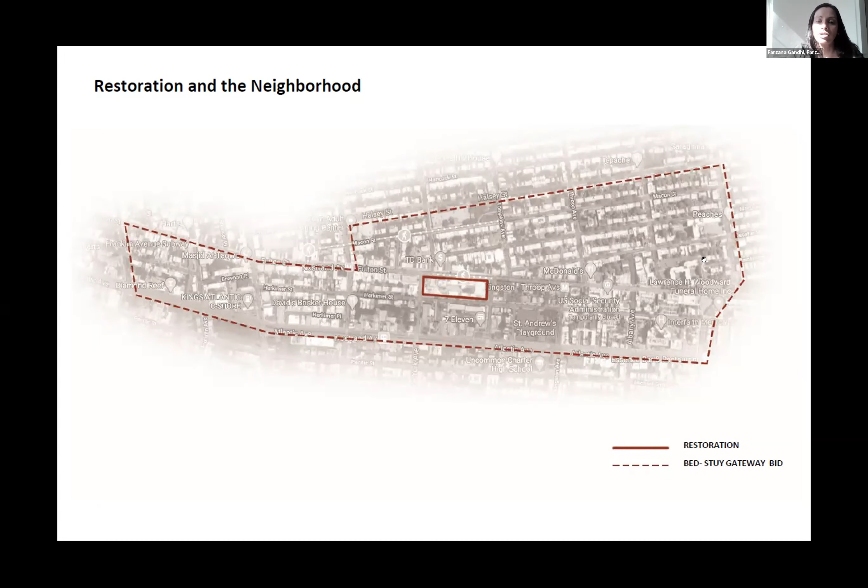With our client, Restoration, these are some images of the block - some open spaces that are public, as well as a large, robust development of buildings. Our relationship with Rachel and Ernest was completely seamless. We met with them every week, and we solicited feedback, but also worked with their team - Restoration Arts, Brooklyn Business Center, and even their social media and events team - to help implement some of our initiatives.

As you can see, the block is within the larger neighborhood, and really what we propose on the block matters and wants to be consistent with what's across the street. Here we started to reach out to both the Gateway BID as well as the BID team so that a cohesive fabric of initiatives could be made.

And then finally, with the community, I would say that our community engagement campaign was a very robust one from the very start. My firm and my team led this engagement with over 25 stakeholders through several Zoom meetings and other individual meetings with individual organizations.

This engagement continues through workshops and also door-to-door with various community residents. Essentially, these stakeholders represent a cross-section of the community through the organizations they serve - whether arts and culture, small business, education, religious organizations, community boards, council members, city agencies. Really, it's about working together to develop a holistic vision of implementation through a series of complementary projects that can reinforce and build on top of each other.

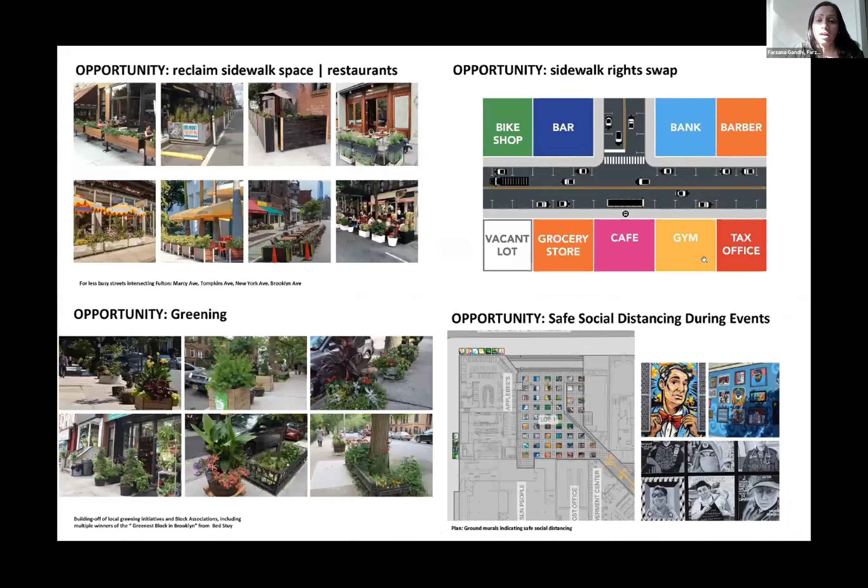And we received feedback not only through our meetings, but we made our meetings public, with Facebook Live sessions and the like, and we started to collect feedback from everyday community residents. We offered opportunities about programming and DIY furnishings that could help with social distancing and reclaiming sidewalks and greening our spaces in an effort to provide a safe reopening.

The social media outreach was 21,000 community residents strong. Links were distributed through our partners to various constituents. Over 820 people tuned in live. 60 and more are continuing to engage directly. And these are being reposted on various social media channels across.

Some key takeaways were about clear communications. So I'll start by offering some of our short-term strategies. This is some signage from our friends at Partner and Partner that have started to populate the neighborhoods already and offer clear guidance on how to reopen.

My team also led the design of a series of pamphlets for various constituent groups - office workers and clients, small business owners, and then one that serves the community at large as part of a Be a Good Neighbor program. This is just a sample of one. You can download them all on the Van Alen and UDF website. We used fun, clear, colorful graphics with minimal text to demystify some of the guidelines of how business owners in this case could safely protect their customers and clients.

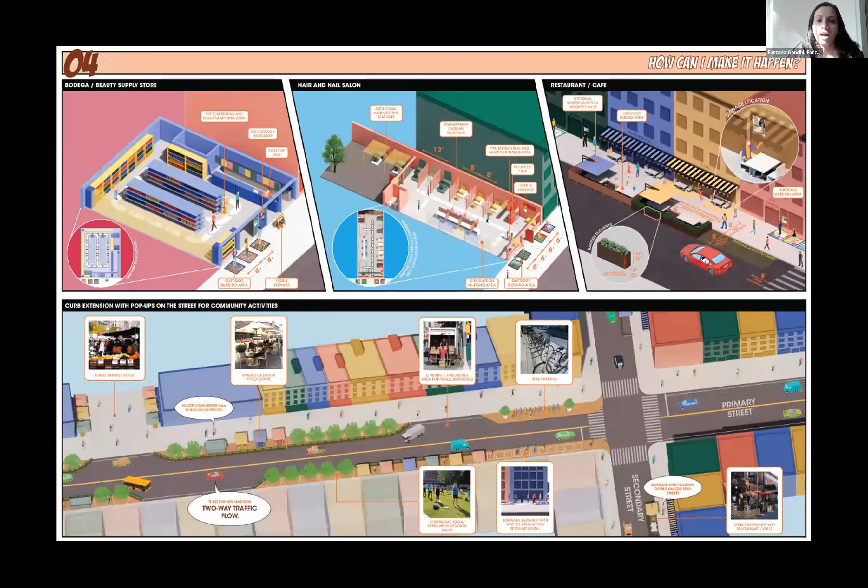We went ahead and also came up with strategies for some of the businesses in the district, including beauty supply stores and bodegas with one-way circulation systems, and hair and nail salons, for example, with partition systems and point of sale PPE distribution.

And these pamphlets really serve to clearly communicate how all of these things can happen.

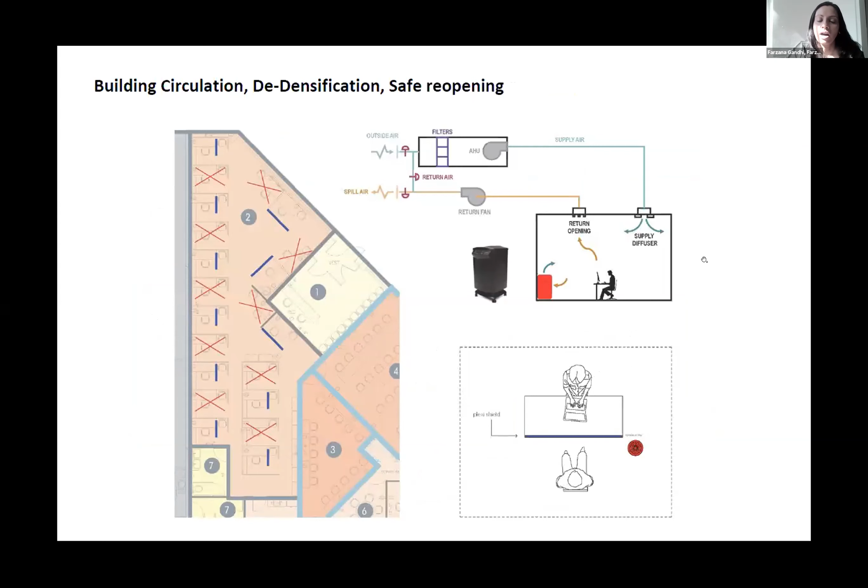KPF led a valiant effort for inventorying all of the buildings on the block and coming up with de-densification and circulation strategies, in and out, one-way flow, and even down to the furniture level within our spaces, so that distance could be preserved within the spaces.

We worked with JB&B to provide HVAC guidelines as well as cleaning protocols and utility tools.

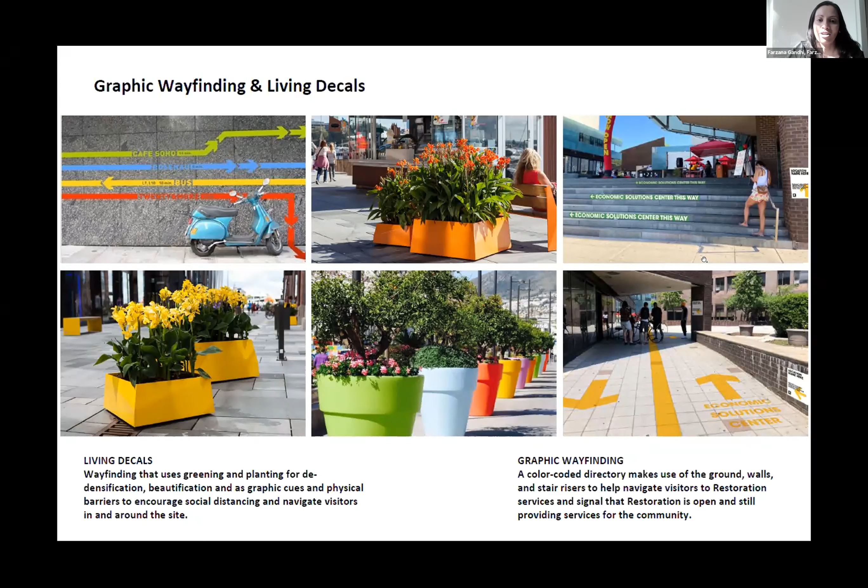James Corner Field Operations has extended the circulation system out to the open space on the block with wayfinding that's colorful and painted on the floor, on walls, and even stair risers, and living decals, as they call it, with potted planters that are color-coded and actually act as graphic cues and social distancing measures.

A big shout out to Blondie's Treehouse for all of their donations. We expect to see some soil, some plantings, and some planters showing up next week for installation.

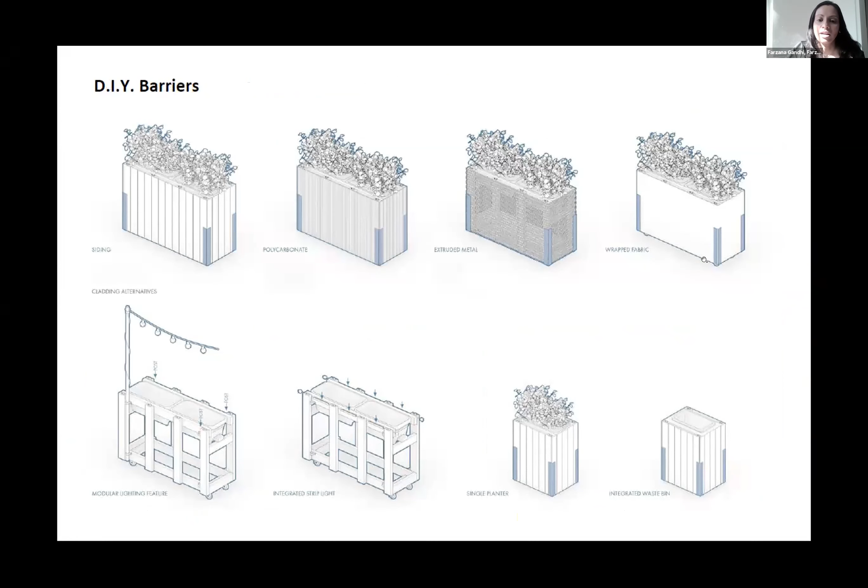Along with that, AE Superlab from our team has come up with a series of very easy to build, using just 2x4s and simple cladding materials, DIY barriers for planters and wastepaper baskets that businesses can now start to implement and replicate for their own street-side cafes.

I'd finally like to close with Community Build Day that Hannah mentioned, which will be happening within the next two weeks, where we intend to start to implement these things not on our own, but with the community. This includes having community members paint some gridding for social distancing squares on the floor, wayfinding, pamphlet distribution and postering, as well as a workshop to enable and empower small business owners on how to build these barriers.

So with that, I'd like to offer this platform to Lisa Switkin, who's gonna speak a little bit about our long-term strategies. Lisa? Thanks, Farzana.

And Rachel and Ernest, you are an inspiration. So I really do hope that you get to say a few words.

As Farzana mentioned, I have the pleasure of introducing our mid and longer term initiatives, all of which depend on sustained community engagement and really a deep collaboration with Restoration. These initiatives build upon and support Restoration's mission and their four core centers, which Farzana mentioned before.

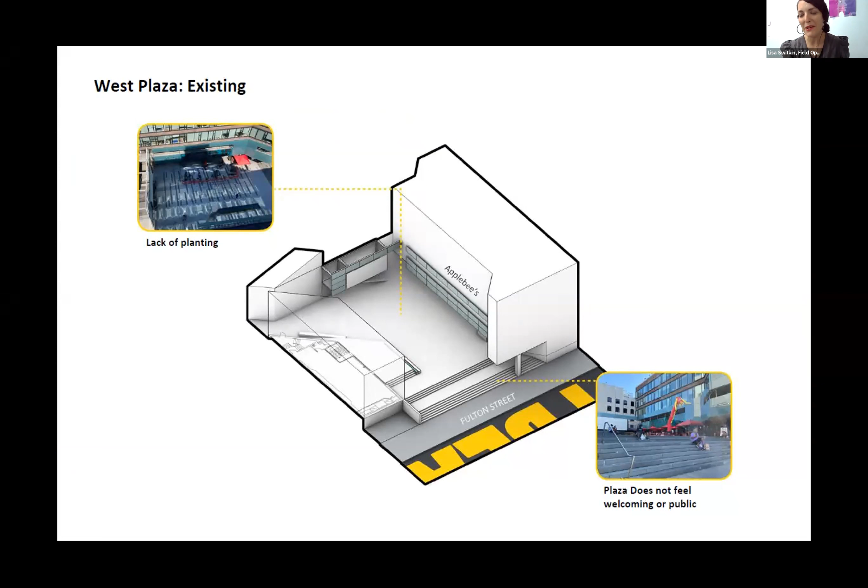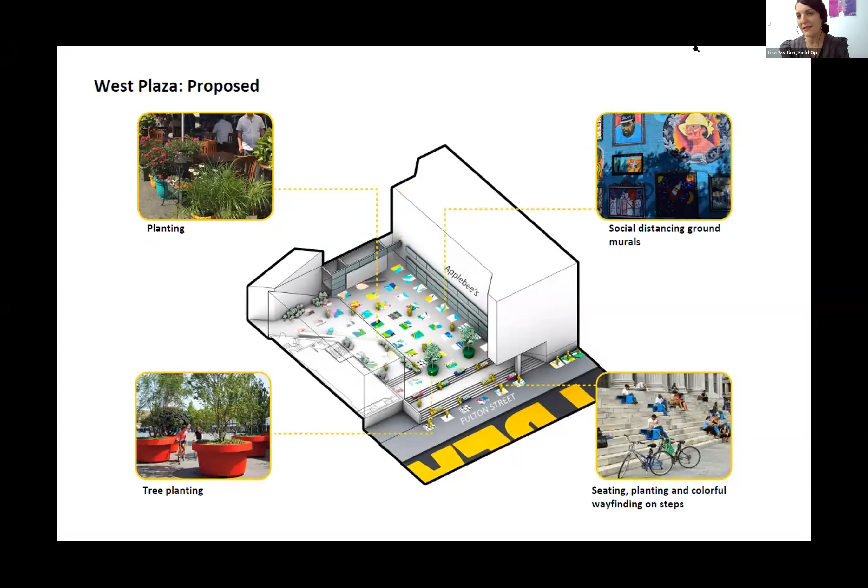So you can see here a number of ideas coming together to really enliven the space, and significant planting and greening efforts, social distancing with the ground murals, the living decals, graphic wayfinding, and kind of a new public-facing community stoop. This is the entrance today.

And then a new sort of inviting entrance that really encourages social distancing, directs you to services inside, and in many ways, most importantly, really signals that Restoration is open and they're continuing to support the community. This includes some of the optimistic messaging. We were really inspired by Restoration's motto, 'Your home, not alone.' This is something that really rings true, I think, for many in the neighborhood.

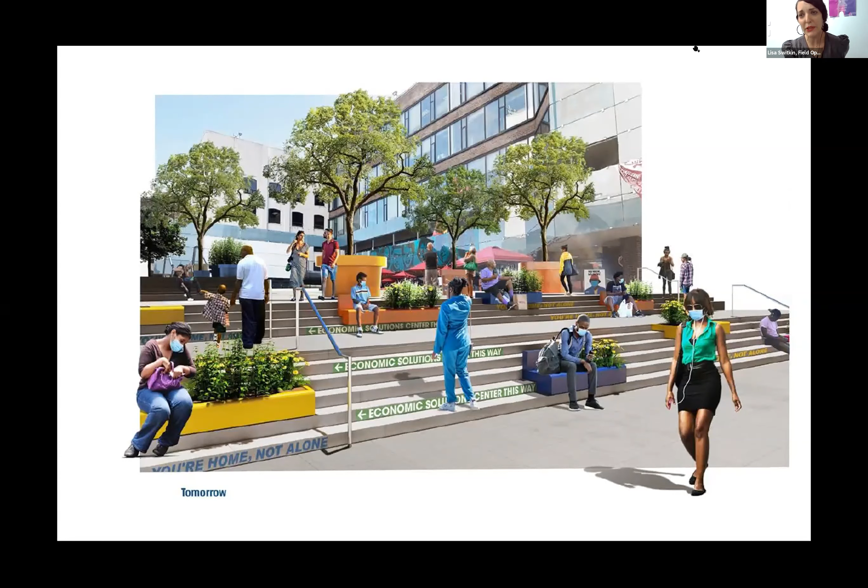The amphitheater is really at the heart of Restoration Plaza. This is where people come together to hang out, to celebrate, participate in community events, and also, in passing, as they're entering for services.

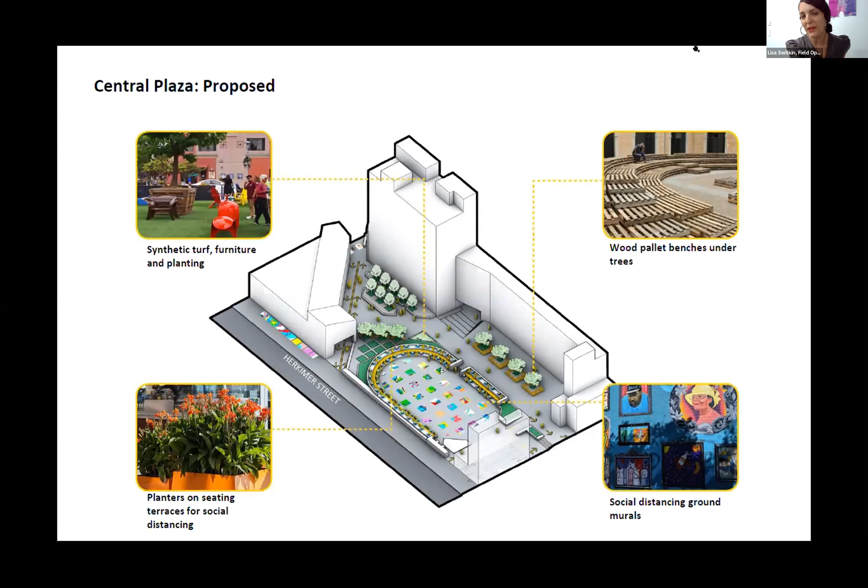And next you can see the extension of the ground murals, the graphic wayfinding, the additional greening efforts that encourage social distancing and provide a new sense of vibrancy and life. This was something that was important to people, that it's not just about all of the negative impacts of COVID and everything else, but also enhancing all of the creativity and the positive things that have been happening in the community as a response to that.

So here you see the amphitheater today, and then a greener, more active and uplifting space that really allows the community to safely come together, with year-round programming that draws people in during the winter months.

And we also learned this was a kind of throwback to a historical ice skating rink that used to be here. Another idea that we had was about found space.

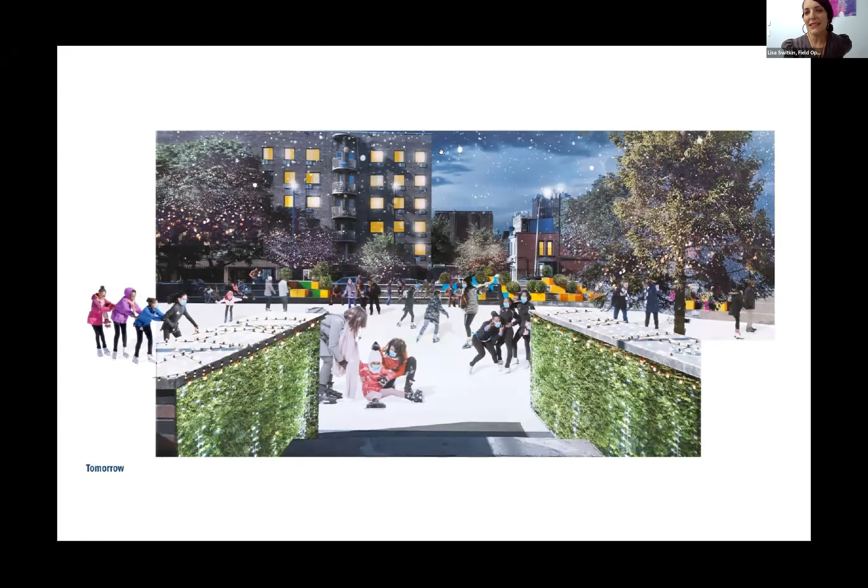So creating rooftop pop-ups and other public pop-ups wherever possible to allow access to fresh air and to promote mental and physical health and well-being.

I think in many of our conversations, mental well-being was really underscored in this neighborhood as getting considerably worse, with loneliness, with loss, with the Black Lives Matter movement, and all of the things that were happening. Finding ways to help alleviate that and allow people access to mental health services, as well as space that is more restorative, was really important.

This is the rooftop today, which is a large area actually accessible via an elevator, and then a kind of new rooftop pop-up that builds off of the Restoration Center for Healthy Neighborhoods.

This group is really at the forefront of empowering communities to improve access to both healthy food and increase physical activity. We were inspired by the motto that healthy minds and bodies strengthen our community.

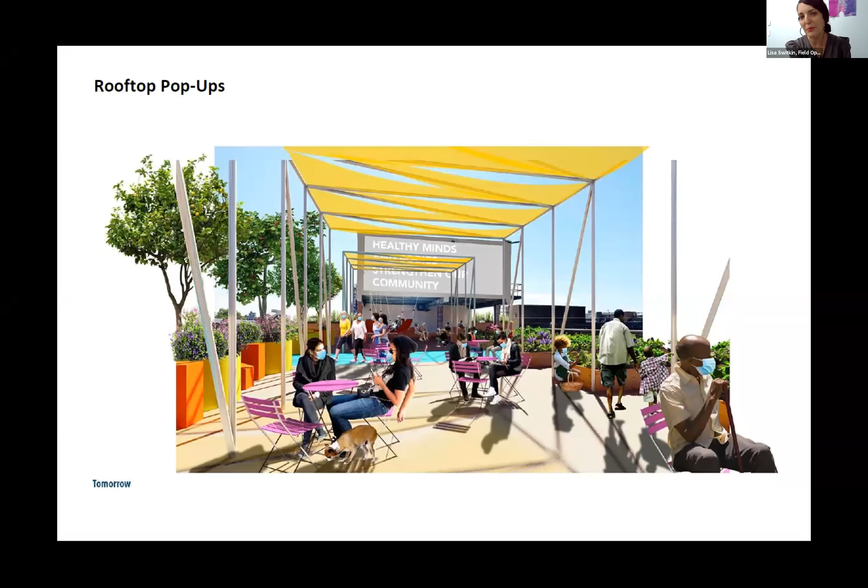So the rooftop pop-up really embodies those opportunities for community gardens, urban farms, and potentially places to relax and exercise. Moving on to some of the longer term initiatives, all of these contribute to that larger Be a Good Neighbor program.

That Farzana was referring to. This connective corridor is really about working together to create a network of urban and open spaces that help businesses reopen, and that green the neighborhood.

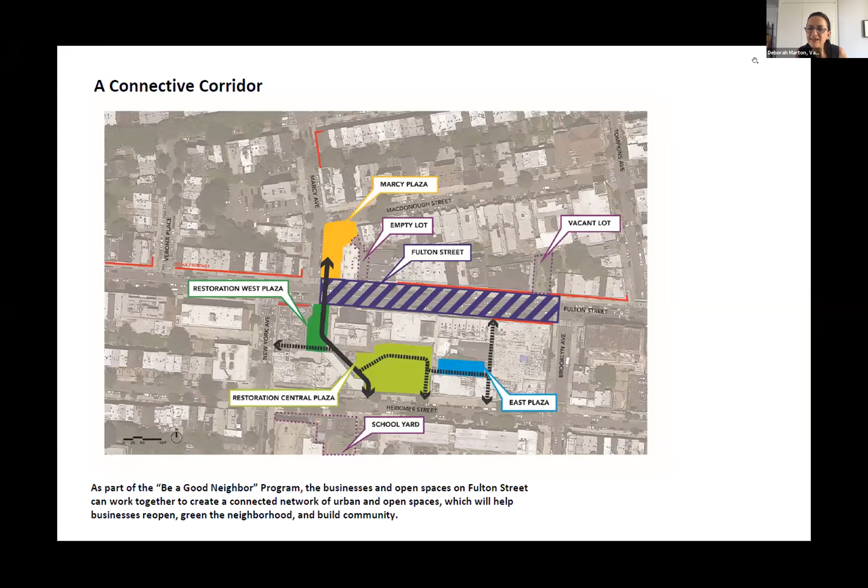I think... Lisa, you're muted now. There you go. Yep, it wasn't me. We're about out of time. If you could. Yeah, we're almost done.

As was mentioned, most of the businesses along this corridor are on major and busy streets. There's a lot of traffic, deliveries, buses, and so most of the restaurants are takeout. So outdoor cafes weren't really a priority here, but instead this idea of temporary street closures potentially.

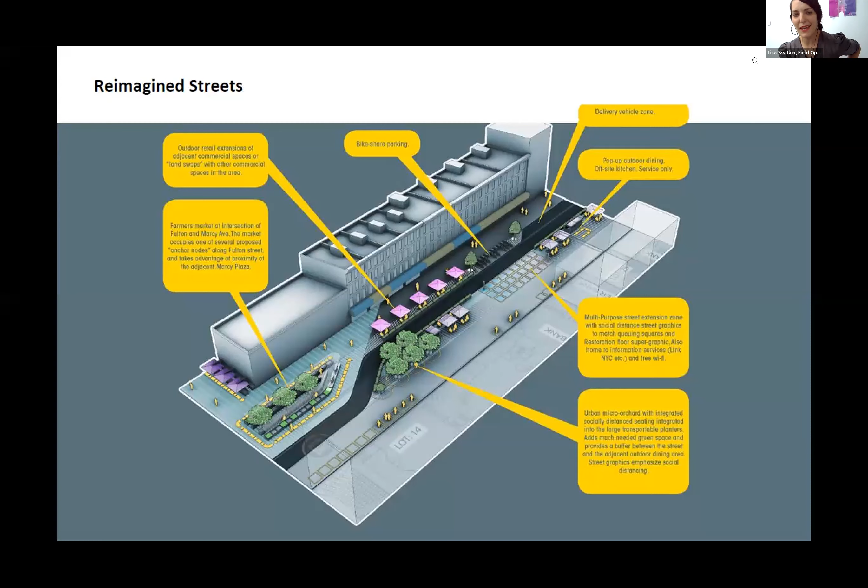We even had a community brainstorm for a Bed-Stuy smorgasbord, and some names that came out of that were Stuyborg, Smorgasty, Bed-Stuy Yummy, funny things like that.

The land swaps is something we've been working very closely on with DOT and DCP, as well as with the community. This is really an idea about retailers or buildings that have extra frontage or vacant lots sharing space with those that don't have it.

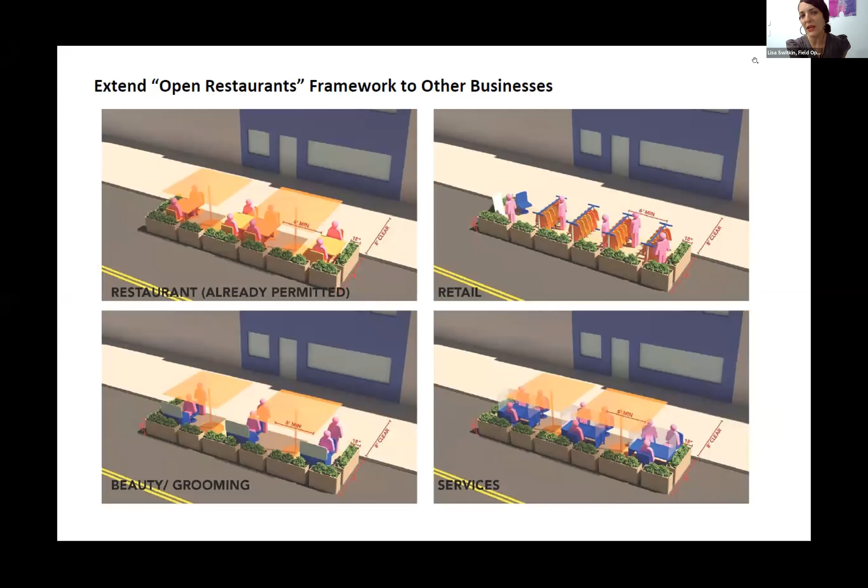Some of the things here were also to demonstrate how to extend the open restaurants framework to other uses, such as retail, beauty and grooming, or sit-down social services.

And these don't require the city to get involved. The actual privately owned properties and landlords can share their space for temporary use, such as this.

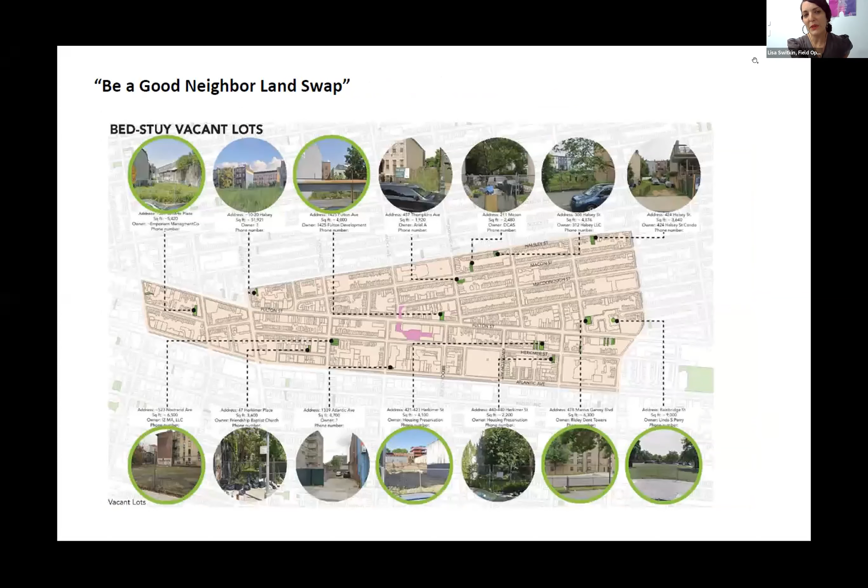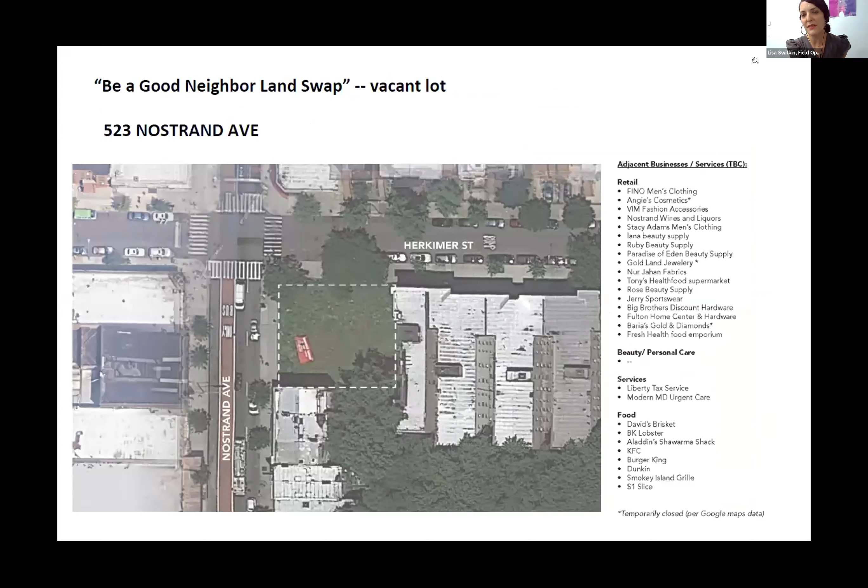And finally, we've built an inventory of vacant lots and storefront vacancies that can be temporarily repurposed. There's an example at the end here of a vacant lot analysis and inventory, marking out ways for a kind of kit of parts for how that could be used.

And just wanted to end with one call out. We want to encourage everyone to be a good neighbor in your neighborhood, and of course, if you're a resident in Bed-Stuy, this is ongoing and we're calling everyone to get involved. There are multiple ways to do so.

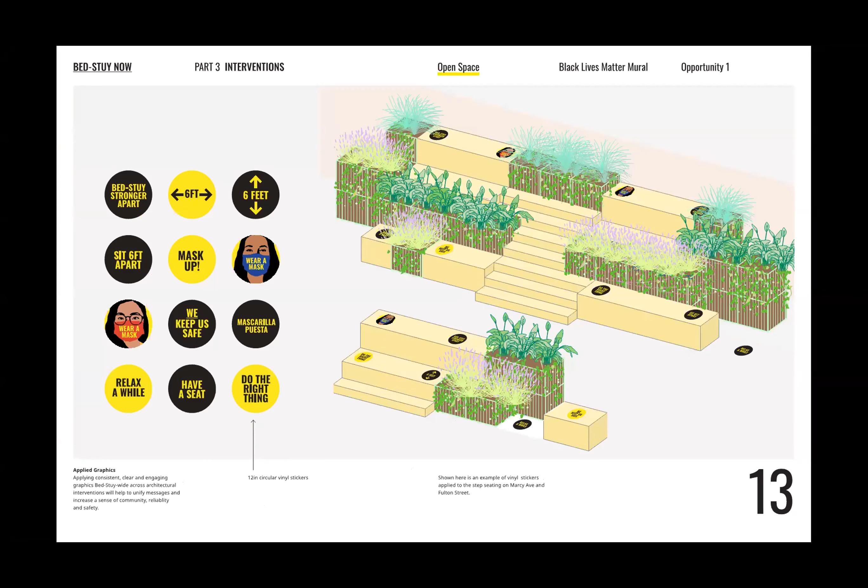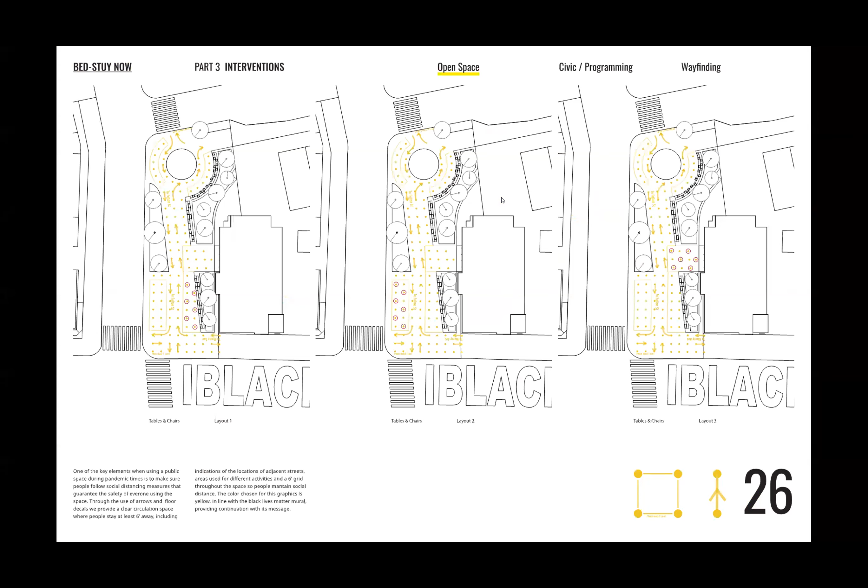We got the preview, so we'll just skip to open space and civic programming. I have Lisa Martinez here, she will present as soon as my computer catches up. Can everyone hear me okay? Yes, we can hear you fine, Lisa.

Great, okay, so I think we'll just pan backwards. With Grimshaw Architects, our site was called Marcy Plaza. If you skip to the next slide, thank you. What we first looked at, if you aren't familiar with the area, is Marcy Plaza, the open public urban plaza between Fulton Street and Marcy Avenue, adjacent to Marcy Avenue, with McDonough Street on the north side and Fulton to the south. It's a really interesting part of the Gateway BID, and from the last presentation, we're actually adjacent to the Restoration Plaza that KPF and Farzana spoke about. So we began with site analysis, understanding what was existing in the community, both from an infrastructural standpoint and looking at the adjacent buildings, and also understanding what kind of activities were going on there.

As an urban plaza, the way that it's used is quite passive in means, but what's been really interesting is that with the onset of the Black Lives Matter mural that was installed in June, this has become a very active point of this part of the community.

So we asked ourselves, how do we spread the message of what is within the Black Lives Matter mural, but also capitalize on what is a passive public plaza adjacent to a couple of really interesting neighborhood resources. So what you see in these diagrams is an analysis of the types of businesses that are adjacent, such as hair salons, a couple of small scale restaurants, a coffee house, and also a few churches adjacent to the plaza.

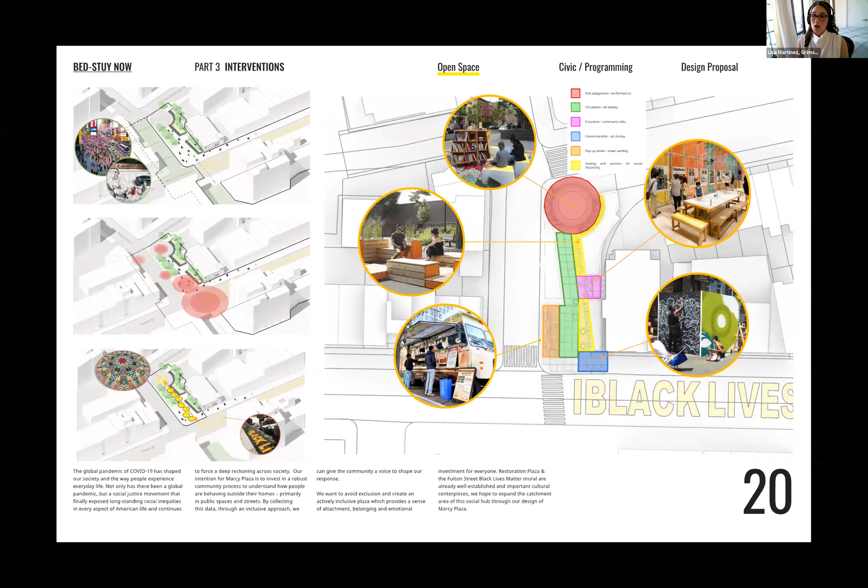So what we learned from the way that we programmed this space was that we needed to provide, give shape and structure to the actual programming effort, and to be able to delineate a safe 6-foot distance. So what we came up with

is a series of modules that we designed with the idea of quick erection, low-tech materials that can be easily installed and adapted. What we found was that scaffolding would be the best way to start to define and delineate space, and that with some plywood seating, plywood planters, ways to actually program some of the areas that we had zoned out, would be a really great way to build upon what this plaza already means for the community.

So we have a couple of renders and a couple of precedents that we looked at as to how scaffolding, with installations of art, graphics, and fabrics, can actually be a really beautiful and active way of creating and defining space that the community itself could become the agents of eventually.

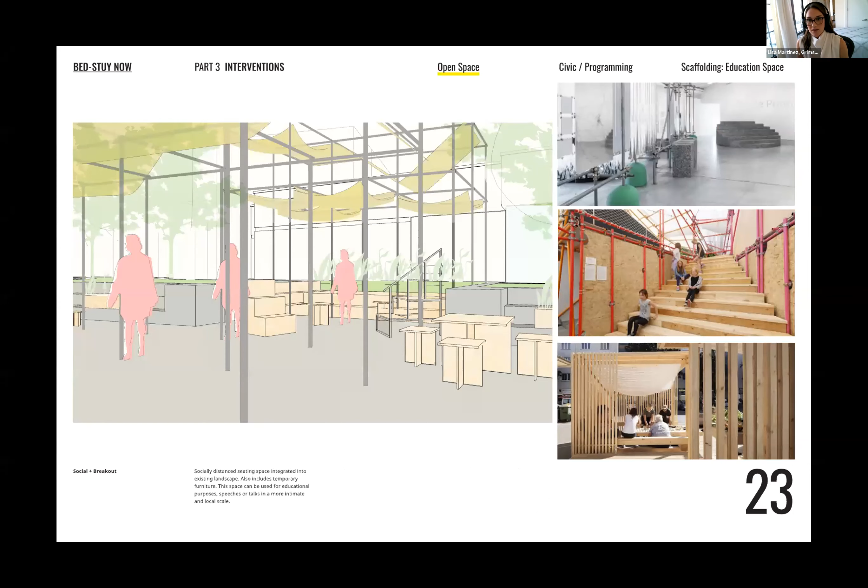And finally, some more of the way that the scaffolding relates to what was already existing in the plaza was really important to us to understand. And then some integrative elements like swings, tables, and again planters, delineating 6 feet was really important.

And finally, we started thinking about how to integrate some things that could be teaching points for the community, such as solar fabric integrated panels for the actual scaffolding, to be able to provide places to charge, to provide places to vend, and actually power a couple of the things there.

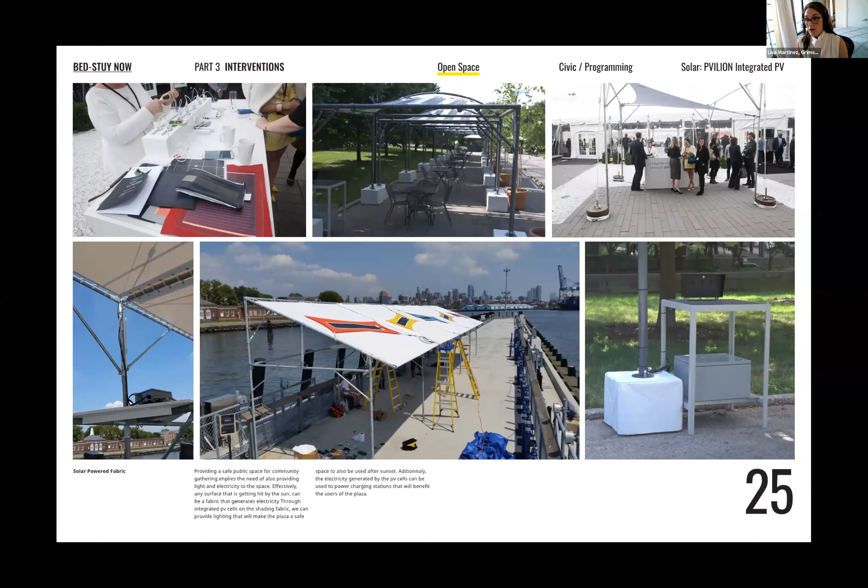And then also, we had to make sure that we understood that the 6-foot structure that was set up by the scaffolding actually worked with the way that people could move around the site. So the way that you could move through from one zone to the other was created with a decal kind of setup so that you could know how to move through the space safely. And that concludes our intervention.

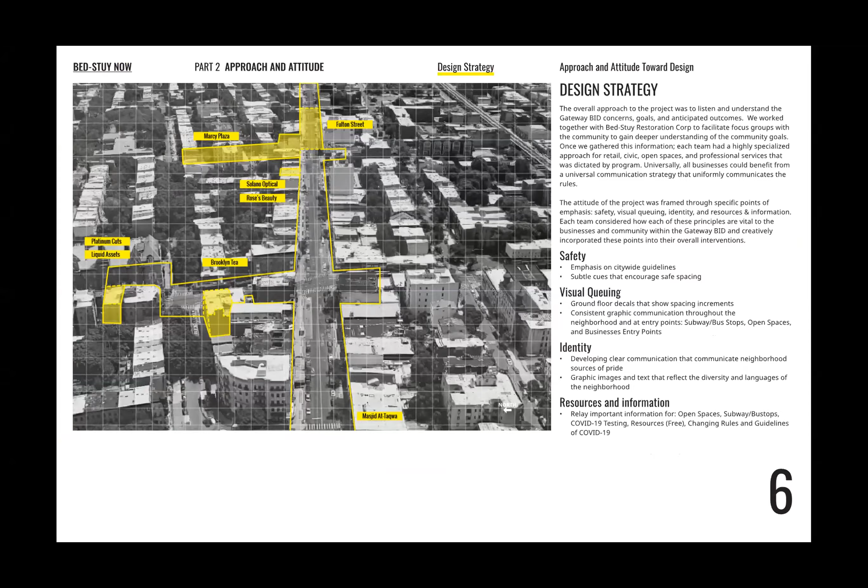Hi, Jonathan, I'm on now. Great, skip all the way back. Take it away, David. Technology sometimes escapes us all.

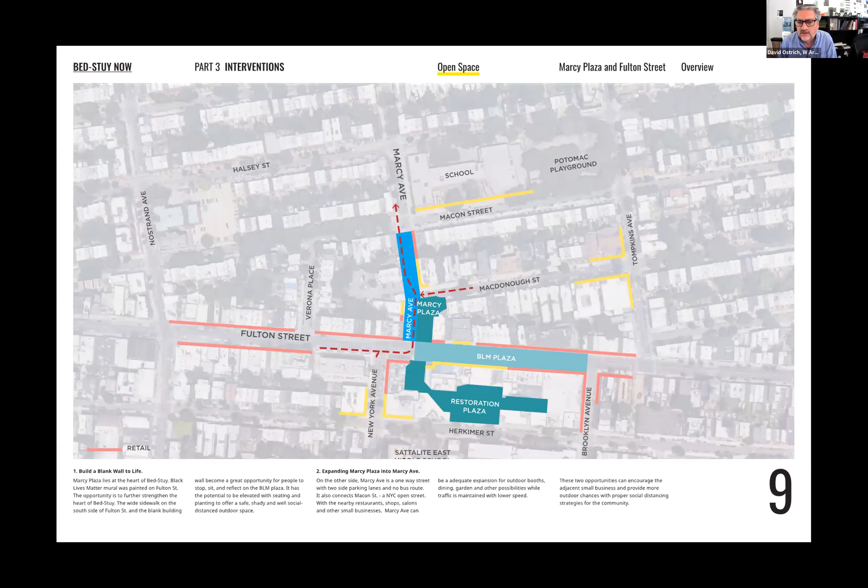We were tasked with looking at open space, and we took two spots: Fulton Street in front of Restoration Plaza and the BLM mural, and also Marcy Avenue. Our goal in looking at the open space was how, in this time of COVID, when people are told to spread apart in urban areas, that's counterintuitive to the whole nature of living in an urban environment, which is to share space with each other and live as communities. We're now being told to pull apart, so we looked at ways to expand the public open space, and in that expansion encourage people to come to Fulton Street and use the businesses there, because there was more space they could feel they could use, and also to really celebrate the Black Lives Matter mural and its importance to the community.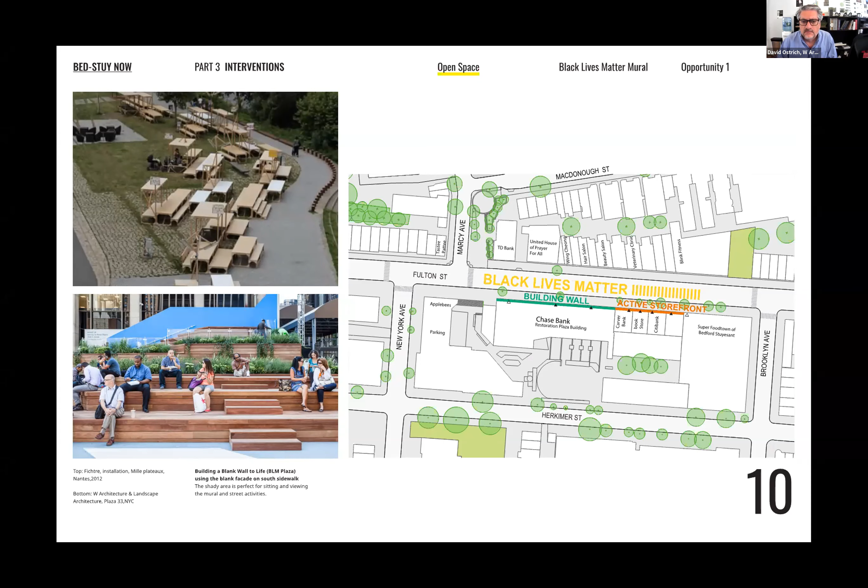What we looked at creating for the Black Lives mural along the wall of Restoration Plaza, which is at the ground level to the first level, somewhat blank, is a palette of gabion planters and wood box seating that could be constructed from scaffolding and easily assembled materials. We wanted to create a pattern along the wall that would facilitate the gathering that needs to go on, acknowledging that in front of the retail stores such as the bank, the bookstore, and Citibank, there's a certain amount of lining. So we created seating along the wall that faded away as we got closer to the stores to the east.

What we created was a series of steps, and those steps allowed us to create separation between groups of people, seating that could program areas big enough for one person, two people, three people, because it acknowledges that though we need to have separation and social distancing, if you come to this site with a family, a parent doesn't want their children spread apart. So it allows some gathering and lets people make choices. We also allowed the spacing to accommodate handicapped seating and associated seating so all can gather together, while creating a planted environment that brings color and life to the street.

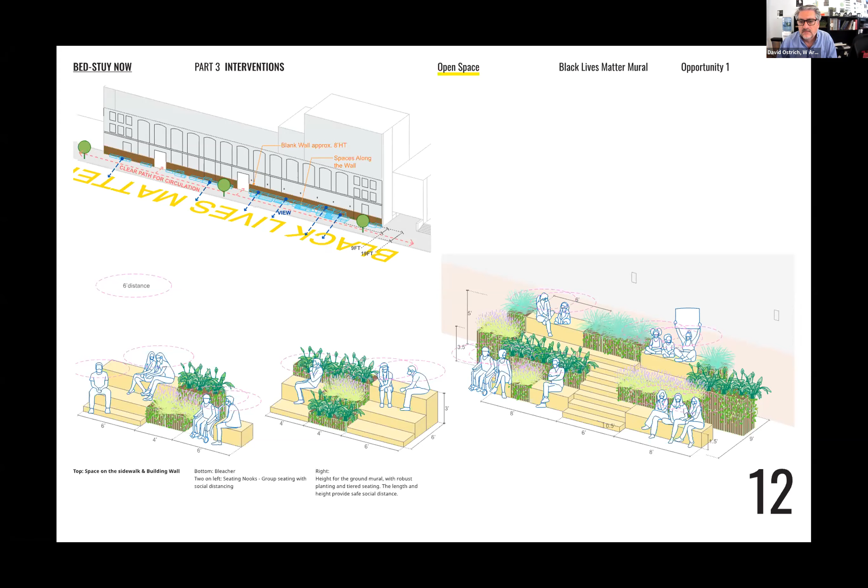This also allows for using the graphics developed by our team to be placed to show individuals where seats and messages are to be incorporated. Next.

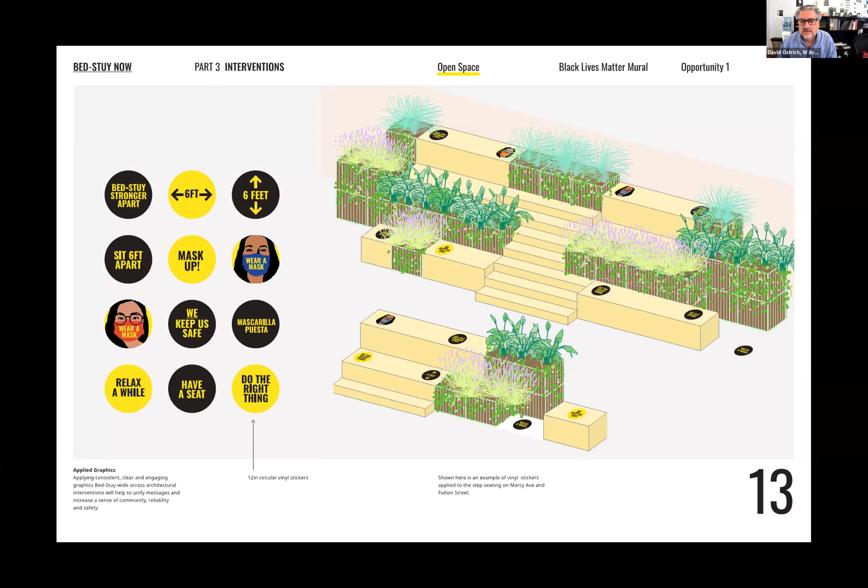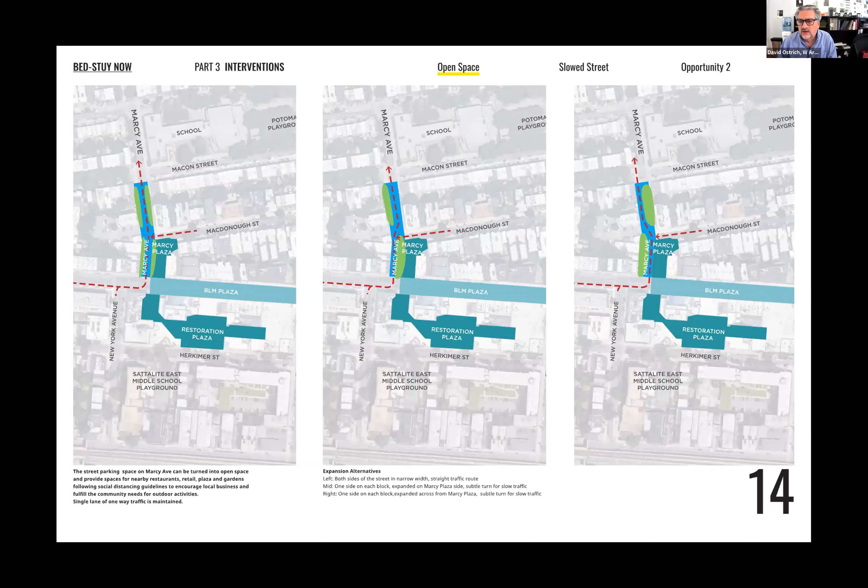We also looked at Marcy Avenue as its adjacency to Marcy Plaza and connection to Macon Street and Macdonough Street. There's also a number of communities and playgrounds, and we wanted to see, regarding Marcy Plaza, how we could expand the usable space. So we looked at a series of options, either taking parking on the side or creating an S shape to slow traffic, and also to create a chance to add usable space.

We chose a pattern that expanded along the west side of Marcy Avenue to allow those businesses to expand. This wouldn't necessarily be space used for specific businesses, but general use, because a number of these businesses are takeout facilities, takeout type restaurants, and people wouldn't necessarily want to wait in front of it. So it allows for general seating. As Marcy Avenue gets towards Macon, as we expand there, we could create additional passive park-like areas for people to gather in the neighborhood. We would also use the same vocabulary of planted gabions and simple boxes to create a movable structure, and also something that creates separation for traffic.

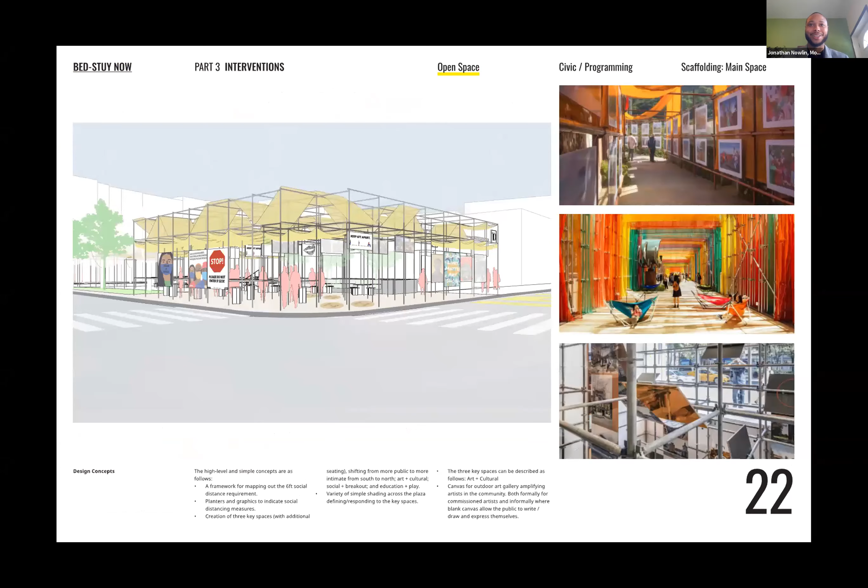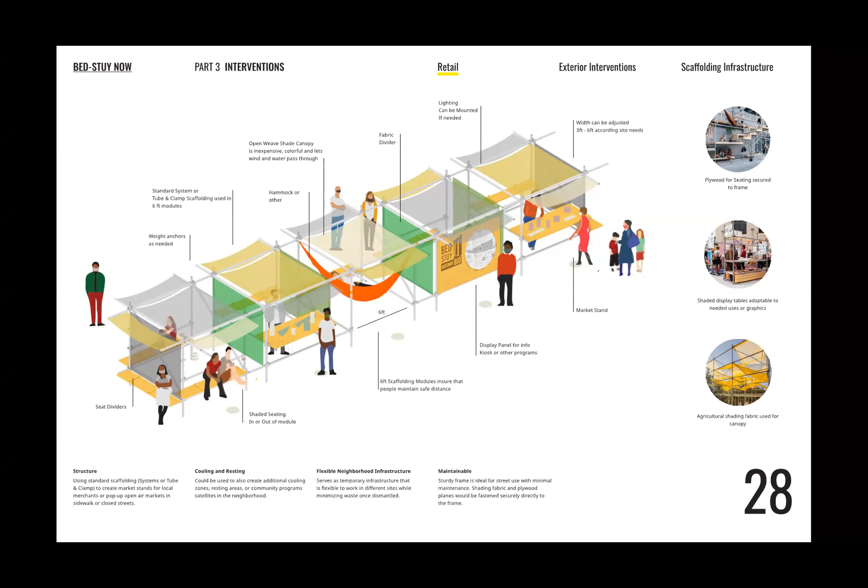Sure. Just quickly, the Design Advocates team was tasked to propose ideas for retail in the bid. Our process involved conversations with business owners and within the community, and brainstorming at multiple scales. At the largest scale, in conjunction with the ideas about open space and civic programming, a proposal for an exterior infrastructure of standard scaffolding systems to be constructed as outdoor retail stands for local merchants and pop-up markets, and amenities like seating and shade.

It's a flexible system that would be a temporary infrastructure easily assembled in various locations to support the activities of specific businesses and/or signage and display for their sales.

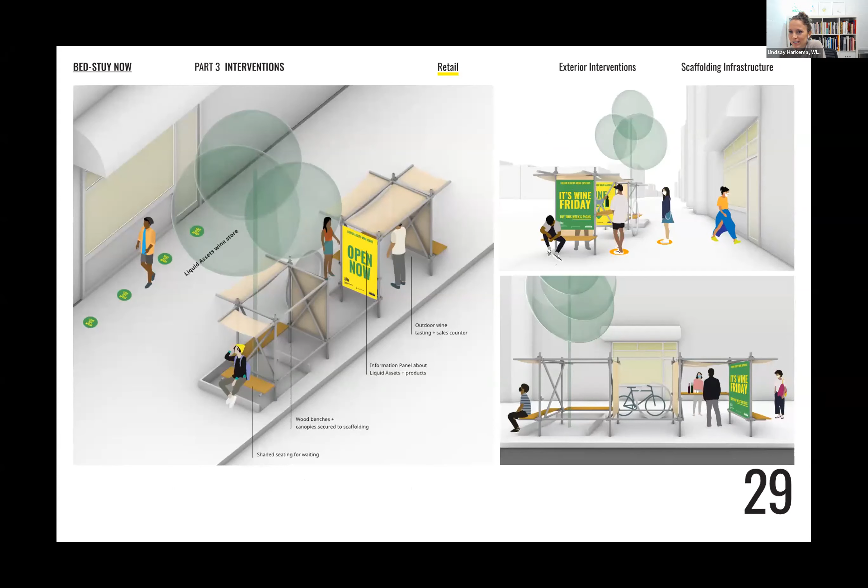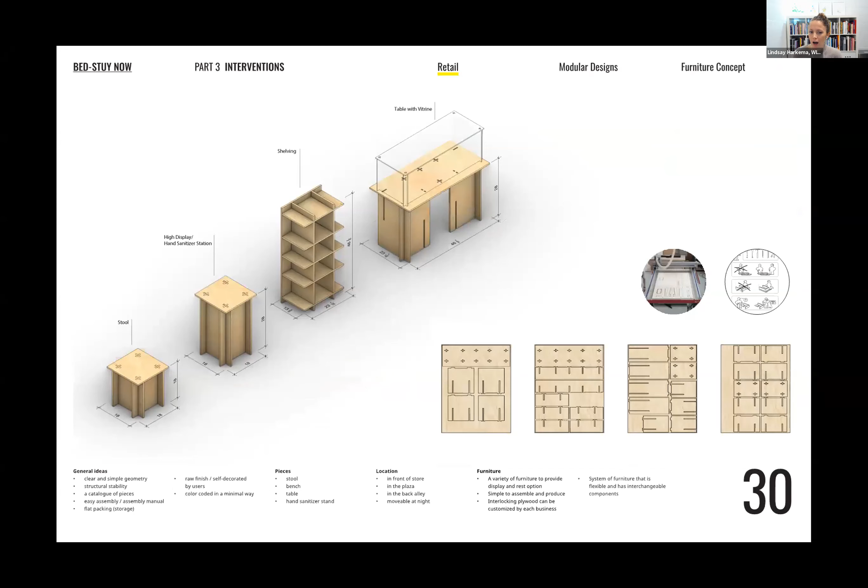At the smallest scale, we proposed a series of small, easily assembled furniture that could be used on the interior and exterior of stores. There's also a graphic strategy as an extension of the broader graphic identity for the bid, to support and share the unique identities, histories and stories of the specific businesses within the community.

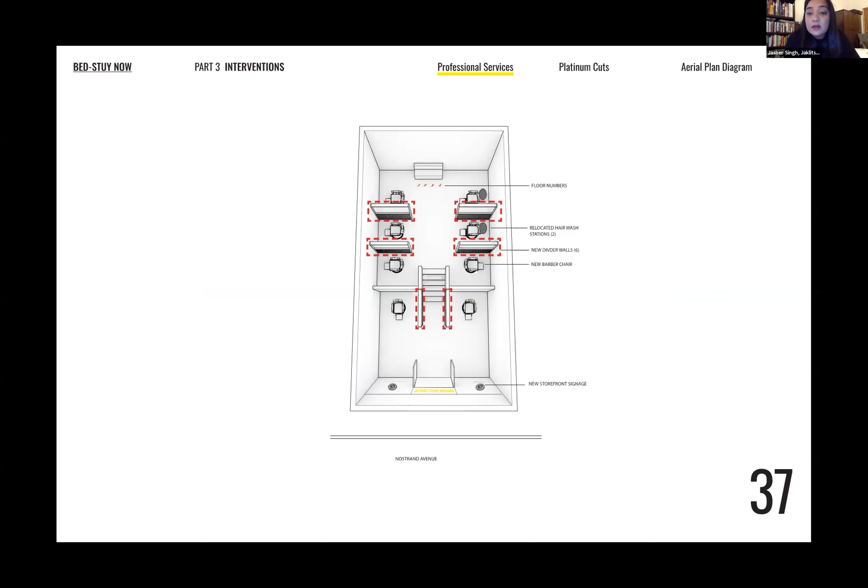The main thing here is that Jerome wanted to introduce another chair into the store, even before COVID. So he was a little concerned that that might not be possible, putting up some partitions, but we figured out a way how to do it. We relocated the hair wash stations, there's 2 of them, and then we added the new barber chair on the upper level there that you see on the left.

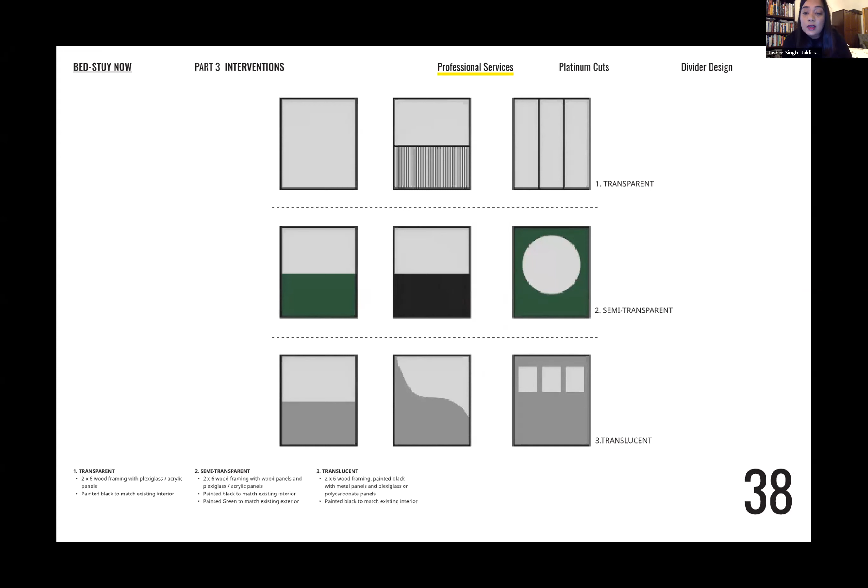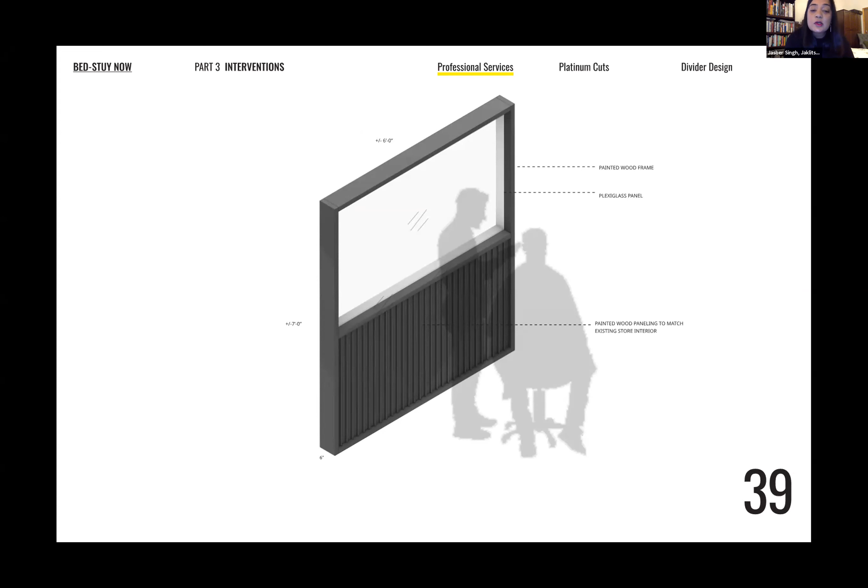We provided 3 options for the partitions. The first one is transparent with a black wood framing. The second is semi-transparent with plexiglass and black wood framing. The third option was metal with plexiglass. Jerome chose the second option here with the black frame and plexiglass. He wanted the black to match the interior of his store that he loves very much. He likes the vibe that it gives off to his customers. So we went with this option.

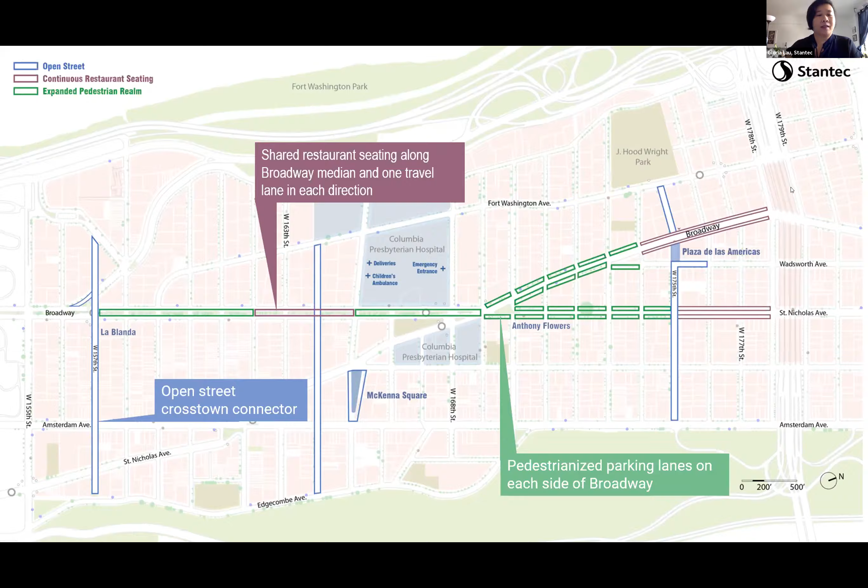So in doing all this, we are really balancing between the need for rapid response and also considering the community partners' capacity for maintenance and operation.

For example, shown here in Plaza de las Americas, most of the nearby restaurants are on a busy traffic corridor, so they don't feel as comfortable doing open restaurants here. So the idea is to shift to this public plaza as an intervention, so there can be collective seating and a pop-up garden for people to get takeout nearby or just take a break in the outdoor space.

Combining with an open street program on Wadsworth Avenue, which is right adjacent to the plaza, we are able to expand the public realm by combining various city programs and permits together. Now that this program and permits have been extended for a longer term, we are finding more opportunity in this ever-changing regulation to see how we can implement more of our concept and help the community partners during the winter season and in the longer term.

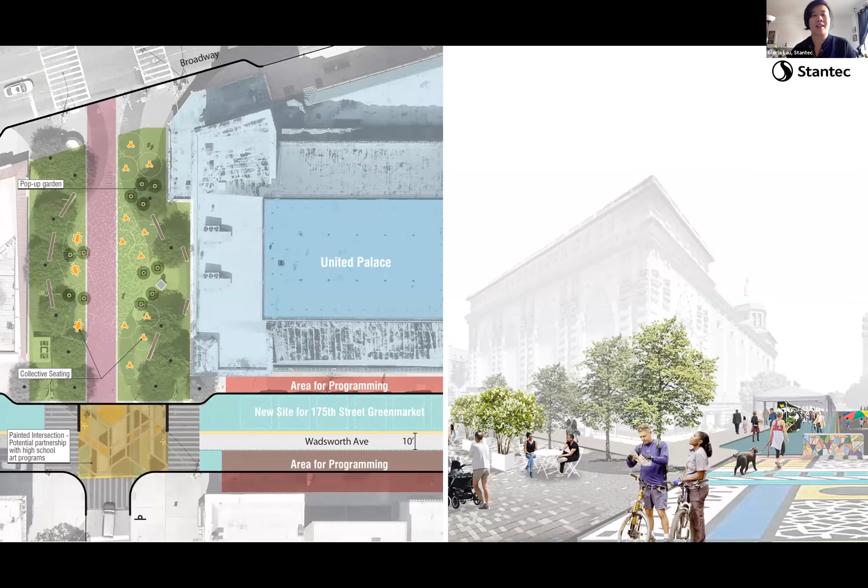Hi, I'm actually part of a group of five small firms collectively known as Design Advocates: Overlay Office, Abruzzo Bodziak, Smithson Sauer, Park Office, and Barker Associates Architecture Office.

As a group, we worked alongside the other typology groups, having conversations with local community members, including retailers, and walking the neighborhood to understand the way existing conditions were, the way sidewalks were being used to have actual DIY retail setups.

After that trip, we started our design process by thinking about our kit of parts being something really focused on off-the-shelf materials and products like milk crates, PVC pipe fittings, shelving components, and greenhouse kits that are easily accessible and assembled by non-skilled labor.

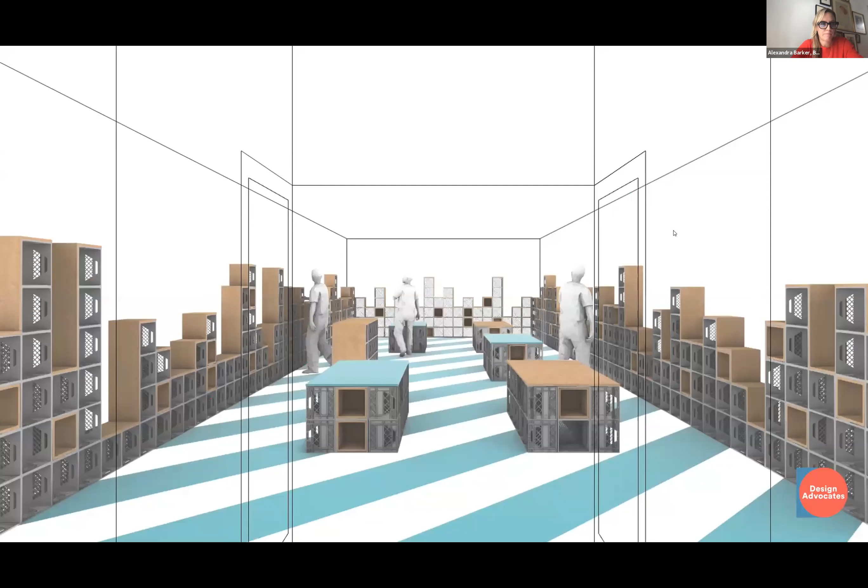In parallel, we are working on compiling a document to assist neighborhood retailers to quickly and economically set up pop-up stores that can take advantage of the many vacant interior storefronts in the neighborhood. Thank you.

Hi, this is David with Woods Bagot. We started this process by doing site visits with everyone, talking to local restaurateurs, and doing a mapping exercise to identify locations for installations and potential open street restaurant installations. We looked at locations of the restaurants themselves, the bus stops, the fire hydrants, and the open space to try to identify these particular locations.

In consulting with the local restaurants, we identified a number of their concerns and interests, including safety and congestion of the streets, and understanding their particular economic needs, which varied from group to group. Some groups didn't want to do an open restaurant because it would actually block the pickup lane for people driving up to pick up, which was interesting. Others were concerned about the cost of installation and how it was kind of short term, at least over the summer.

And then there were concerns about how this would continue into the winter and be a longer lasting solution for these restaurants. We identified a couple of sites where we could actually do an open streets restaurant. You can see in the top left, this was one of the sites between 164th and 165th Street. And for those that aren't aware, that requires three restaurants to actually apply for it.

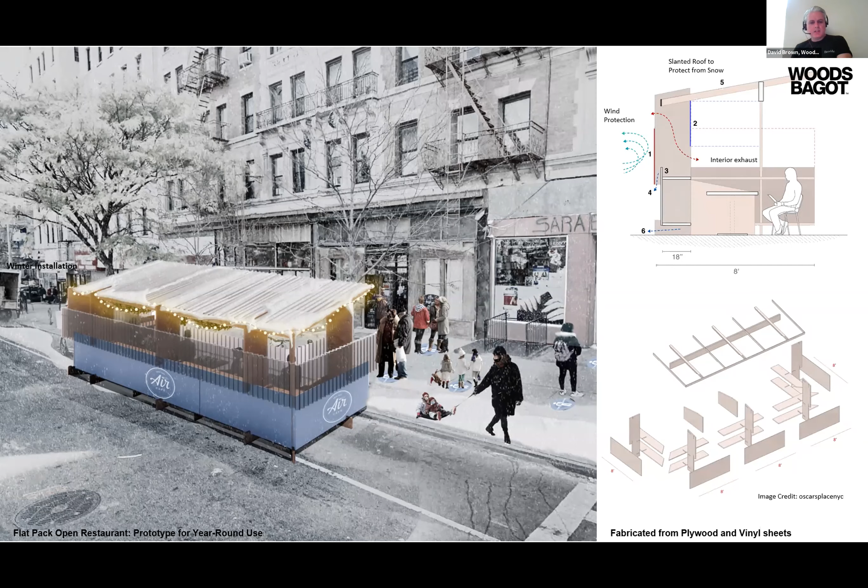So now we're hoping to get some more traction with some of the restaurant owners, since we have this now with the extension of the open restaurants program.

Awesome. Thanks, David, and thanks to the rest of the team. So I'm Kate Watson from Gensler. Building on what the rest of the team has been talking about, I think our keywords are flexibility, this kind of kit of parts approach, and modularity, to really meet the needs of the community.

So as we've been talking about, we really started with talking with CLOTH and various community partners and businesses to hear what were the major concerns. We really heard from them specifically about the educational needs, and that children and teens and people of all ages really needed spaces to come together, to learn, to play, and just to hang out. That was really an urgent need for the community as a whole.

So we focused on creating a flexible kit of parts to support that kind of programming, to utilize public space. So you see here, this is McKenna Square, which is a really interesting site. It's a parklet that we think can be utilized and really bring together a lot of different partners adjacent to this location, to activate this public space in a new way.

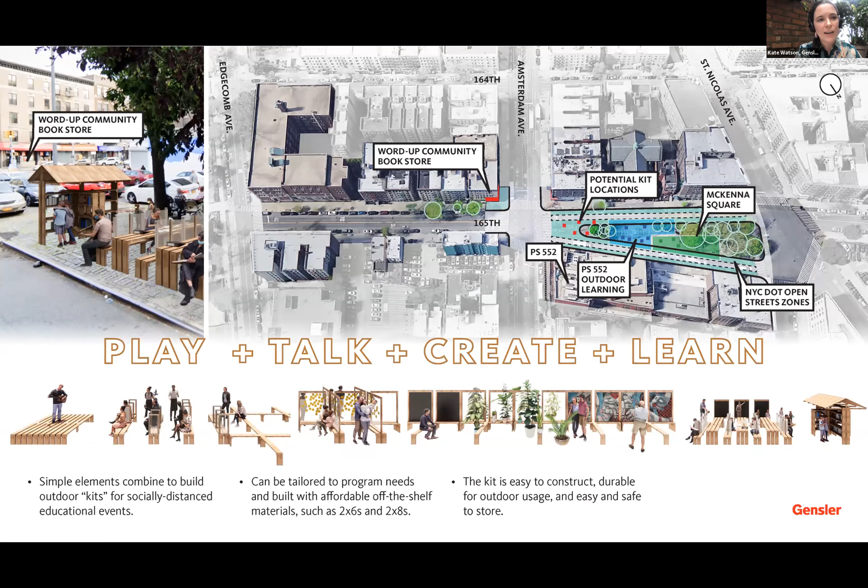From there, we spent a lot of time talking with different community partners about how we could take these simple elements and create a series of programs that might look like readings, author lectures, family reading events, stage discussions, dialogues, etc.

So all of that is to say, in terms of our next steps, we're thinking about how we can integrate all of the approaches you've seen from our group, how we can scale these approaches. We've been working closely with the community to think about how to implement this, how to partner in active ways, and then how to prototype - we want to get our hands dirty and get building and get active. Also, as a few folks have mentioned, how to work with the city and the systems at play to evolve the processes in this extraordinary moment. We have to evolve the standard ways of activating these types of programs and think about new ways for activating.

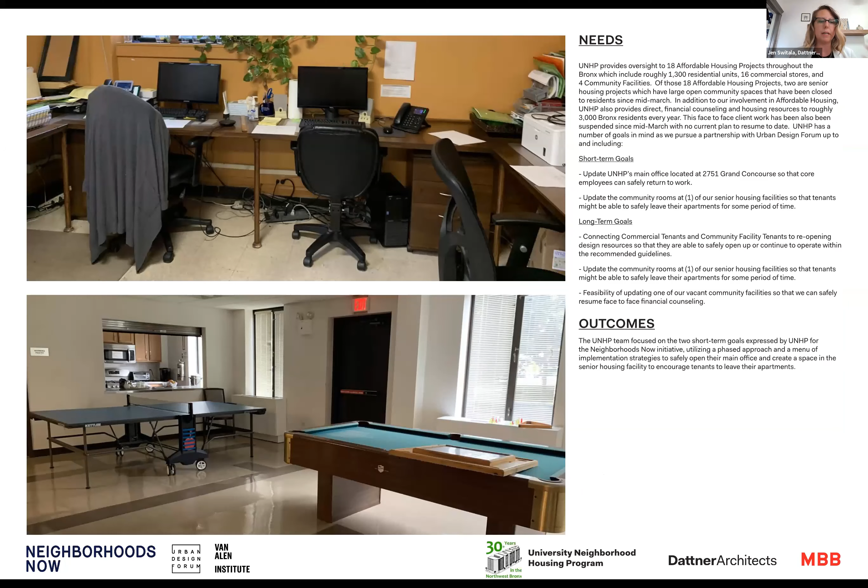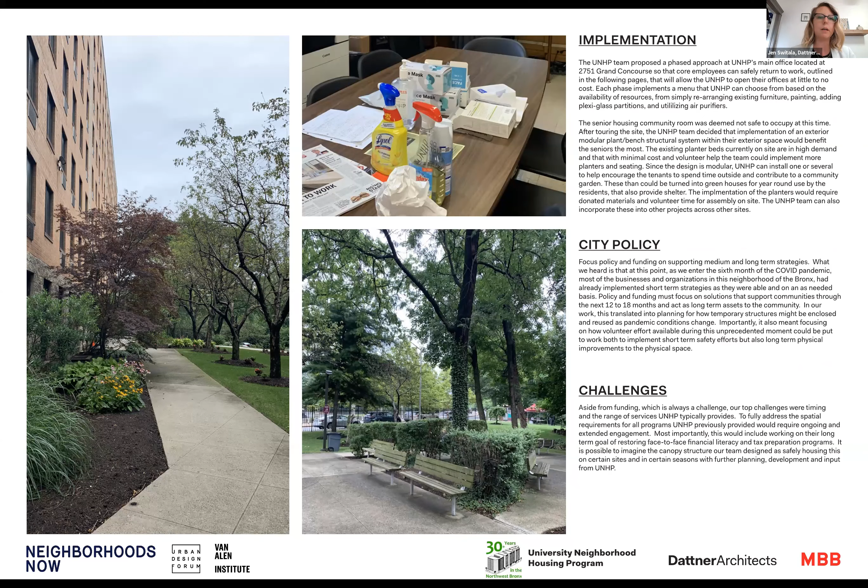We took site visits and listened to what each of their needs were to actually provide a safe working environment and a safe space for seniors to get outside of their apartment and communicate with other people. Our real hope is that although we only focused on these two areas for UNHP, we could take these short-term strategies and apply them across the different buildings and services they provide in the Bronx. We thought it was really important that these ideas, while short-term, could eventually turn into long-term goals and strategies across their other projects when they're ready.

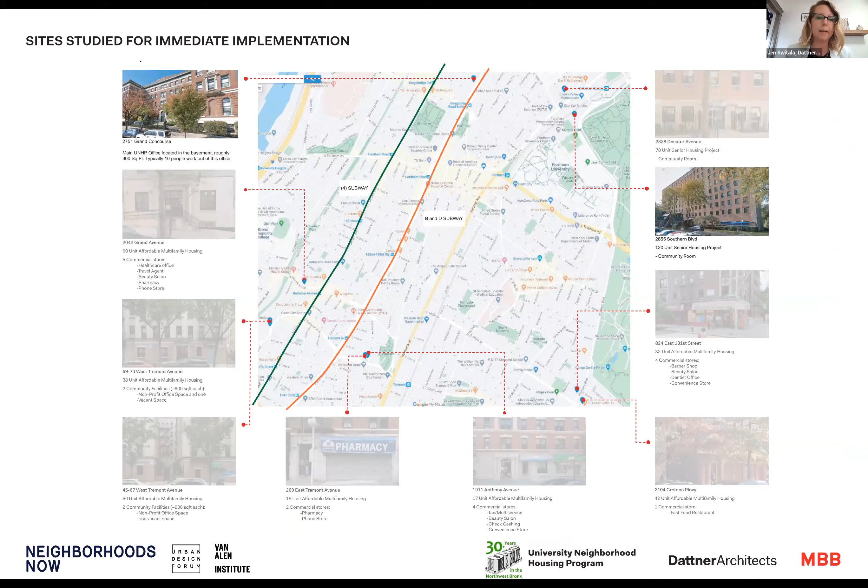So first, I'll go over their office space. As Brendan mentioned, it's a pretty tight space that's grown organically over the years, and they roughly have about 12 employees at any given time, particularly during tax season. When we went to the site, we saw there were so many desks in these spaces that you couldn't really practice social distancing. So we wanted to get a sense of what was actually in there and what could potentially be moved, taken out, or reorganized, since we weren't imposing any extra costs, because funding was obviously a big piece for this. Here's an axon of the existing office space.

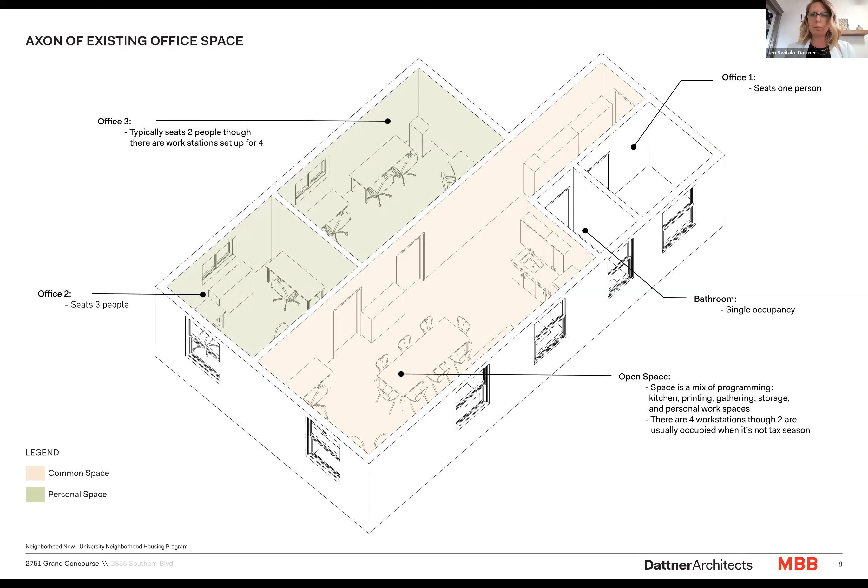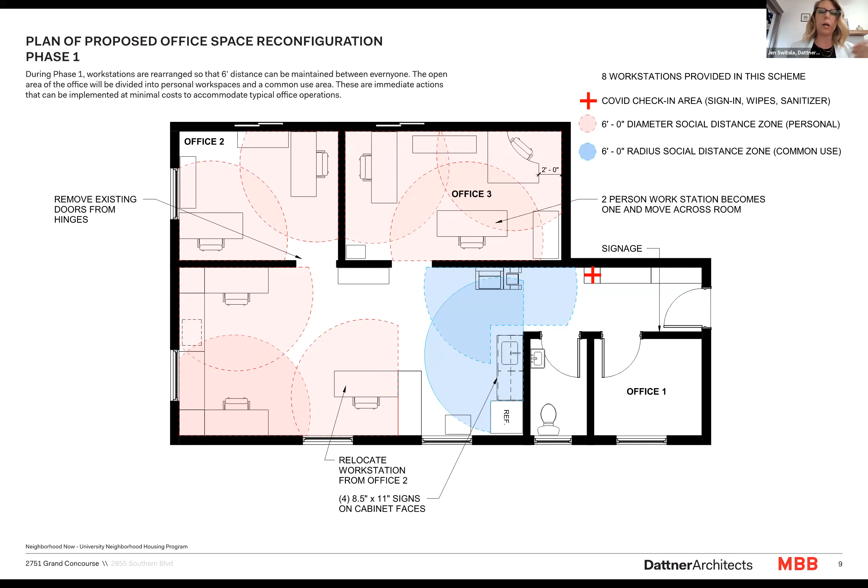We took a 2-phase approach to this. The first phase was to look at allowing people to return to work sometime in January, so they can maintain 6 feet of distance and accommodate their operations just by reorganizing the furniture and creating personal workspaces and public zones within the office that people could feel comfortable returning to. We were able to take almost all of their existing furniture, minus a large table, and reorganize it so their core employees could eventually come back to work. We're hoping this work will start early November, with some staff returning in January. This would also include local air purification systems and natural ventilation to help mitigate the fact that they're in a basement.

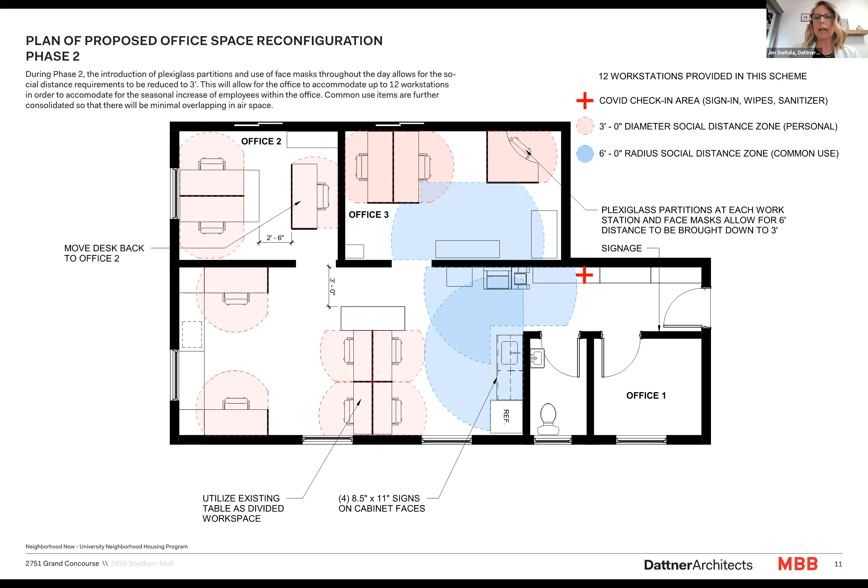Then phase 2, we wanted to actually get all of their employees back into the office. Again, it's taking this idea of rearranging the furniture—we've already rearranged it once—and looking at it again, incorporating plexiglass partitions to allow staff to have 3-foot social distance while wearing a mask. It came down to that same idea of creating personal work zones where people aren't passing each other, so they feel comfortable still working in the office, and public zones where only one person could be at a time.

And again, implementing acrylic dividers, all of which are sort of minimal cost to UNHP. We also thought it would be a great idea to incorporate signage as well as potentially repainting their offices. So we had a couple of options for that as well.

And now I'll hand it over to Sarah to talk about the Rose Hill intervention. Okay, great. If you could go to the next slide.

So here you see our initial site visit at the Senior Housing Center. We originally thought we were going to focus our efforts on the interior space, but it very quickly became apparent in discussions with UNHP and the senior housing operator that with the limitations on the existing windows and the ventilation system, there was really no intervention that we could envision here that would allow seniors to safely use that space. But what we found was this really great outdoor area immediately outside of this community room.

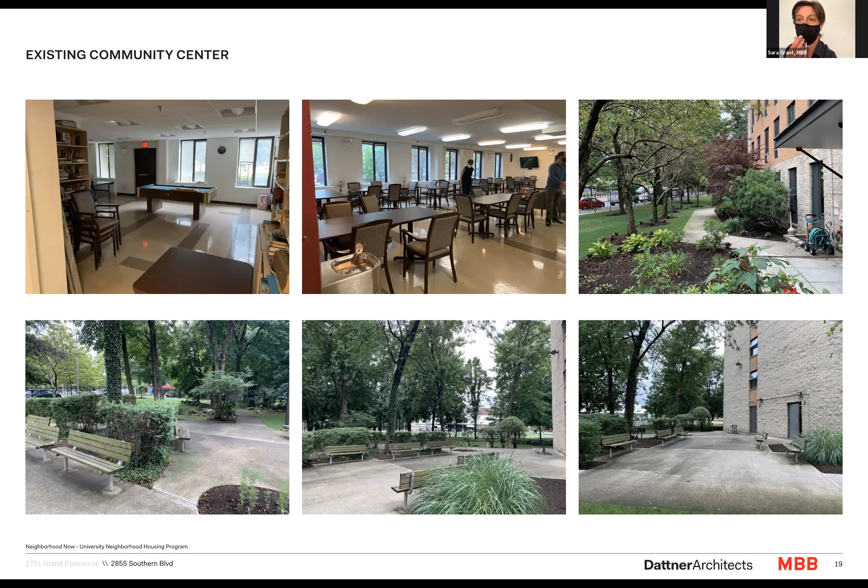So we shifted gears and focused our efforts on that space. And really what our focus was looking at ways to take this existing space and activate it and allow the seniors to come together safely there.

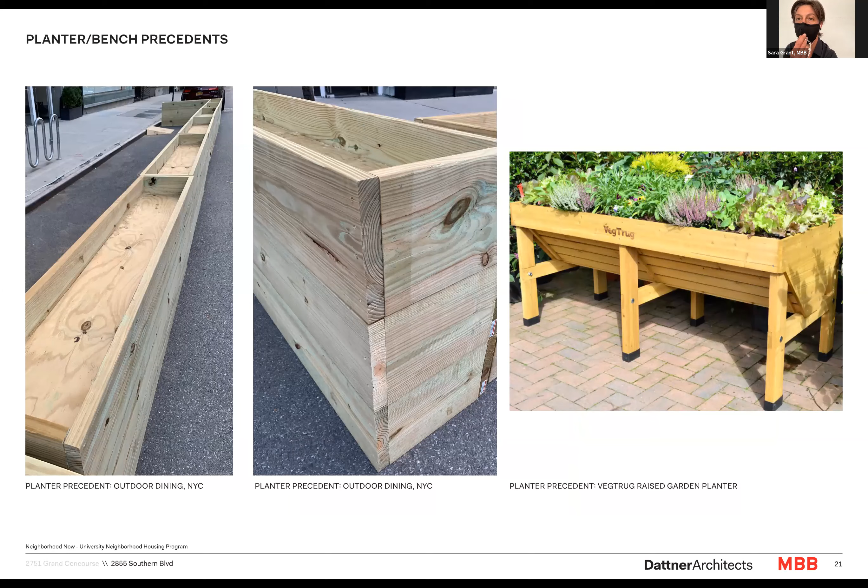Planting, we heard, was a big interest already of the seniors. So we started looking at ways to use planters in that space, drawing from our experience with accessible planters, so that they're raised beds and easy for people in wheelchairs or with all different mobility issues to access. We took a modular approach here.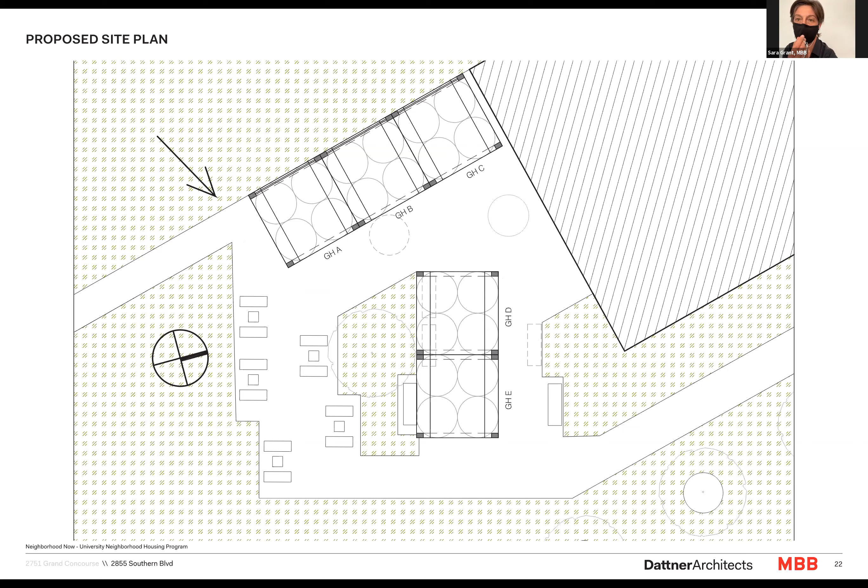The other thing to note is that we were considering the prevailing winds and how to extend the season of these modular units, so that it could be used immediately as a shade structure, or going into the cooler months could offer some additional shelter and act almost as a semi-enclosed greenhouse structure.

We were looking at entirely off-the-shelf parts and using the planting both as something that the community could all contribute to, but also as something that helped provide suggestions as to how to properly distance.

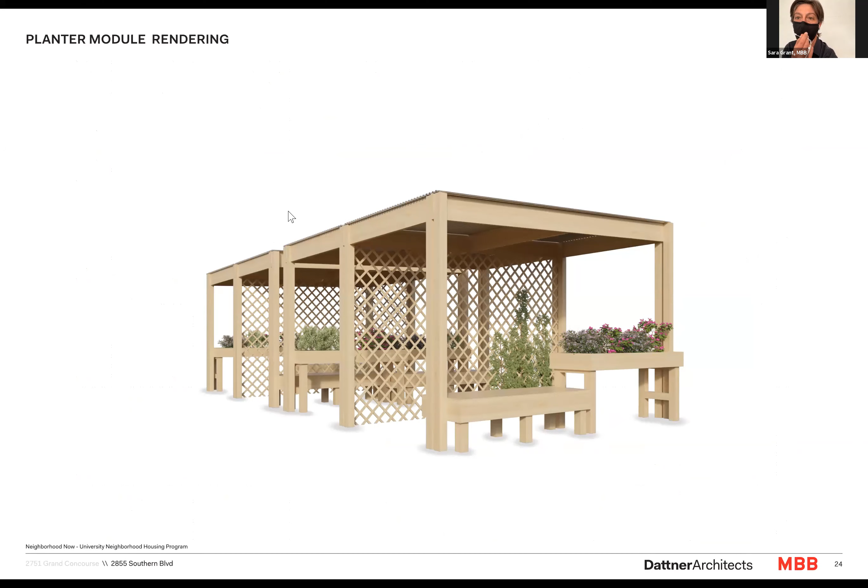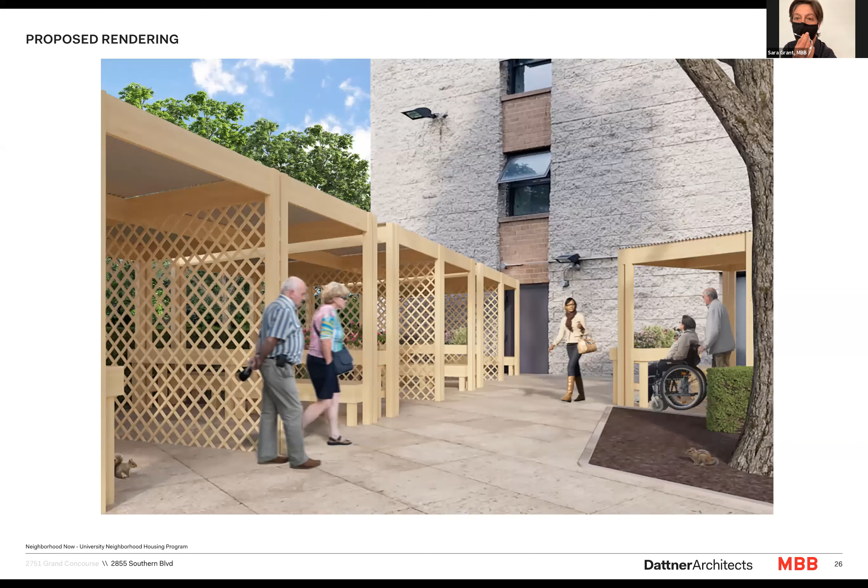It was also important to us that this was a prototype of sorts that could be used at this facility, but also could be introduced at their other facilities throughout their network. So then the next couple of slides just show it in situ - these are renderings showing how it might be on that one particular site.

Sorry for interrupting you. We need to finish up.

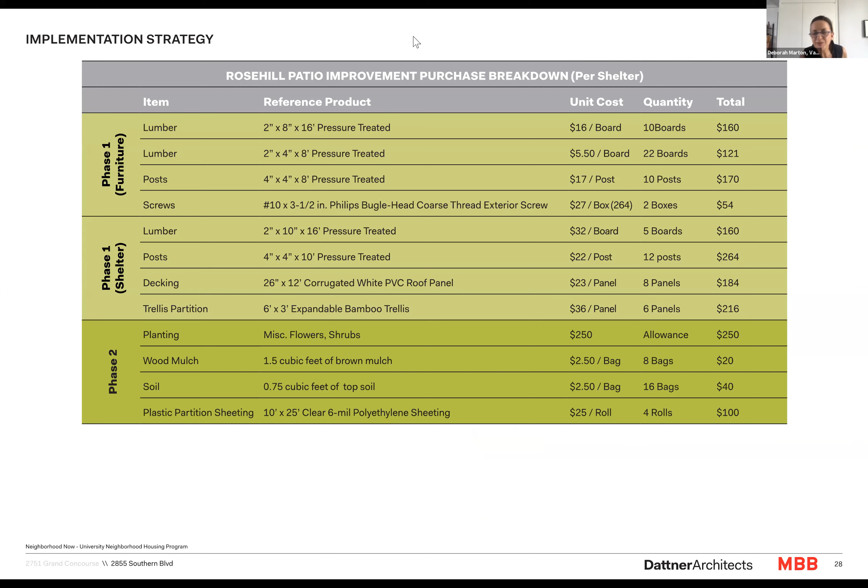Sure. Yeah. So the next slide is the last slide, and it's just saying that we are continuing to work with them around donations and getting this realized.

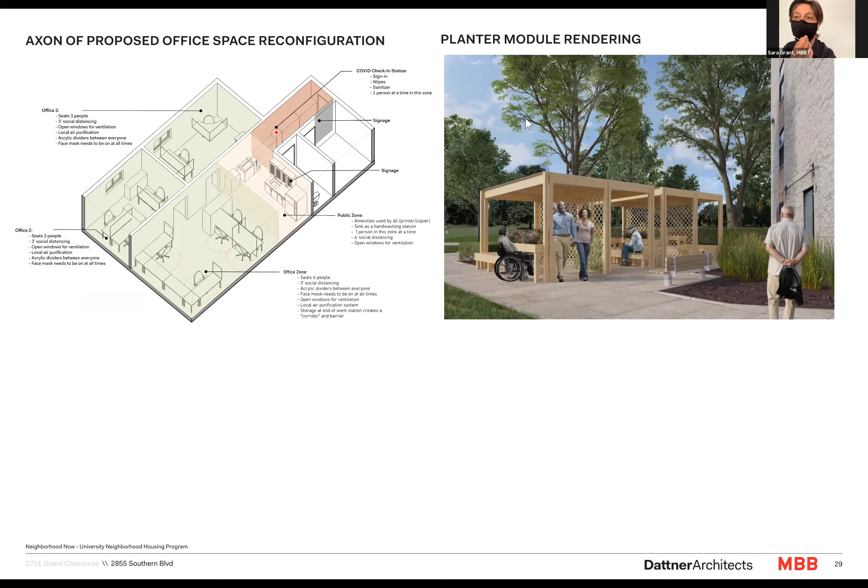Thank you. Thank you. Very elegant scheme.

And now in our last presentation of the day, I want to invite Crystal Ng of Curtis and Ginsberg to present the firm's work in service of Cooper Square Committee.

Hi, good afternoon, everyone. Okay, so our team consists of Curtis + Ginsberg Architects, which I'm from, and engineers from Thornton Tomasetti. And we had the pleasure of working with Daniel, who you heard earlier, on the Cooper Square office and helping them engage their community once again and reopen their office. Their space is pretty emblematic of our ground floor commercial space and represents the challenges of reopening offices.

Their office is located on the East Village, Lower East Side Historical District. And as Daniel mentioned, they're on a typical Manhattan lot that is 25 by 100, which is very deep and narrow, like a lot of their neighbors. It makes it particularly challenging for ventilation, which is critical during COVID.

So you can see here their narrow storefront, and they've made the most of their space. At the top, the front has a small reception area and a front office, as well as a part wall that separates their reception area from their open office.

Unlike a lot of the outdoor programs we've seen today, because their work requires some privacy to advise their community and clients on their housing issues, we focused solely on the interior of the building. The goal of Cooper Square was to get their space safer for their staff and also to meet with their clients.

It was important for us to understand how they organize themselves within their space. They had a front office, which they had rented out previously and were not using. But in general, pre-COVID, people would check in and just meet with their clients at their desk.

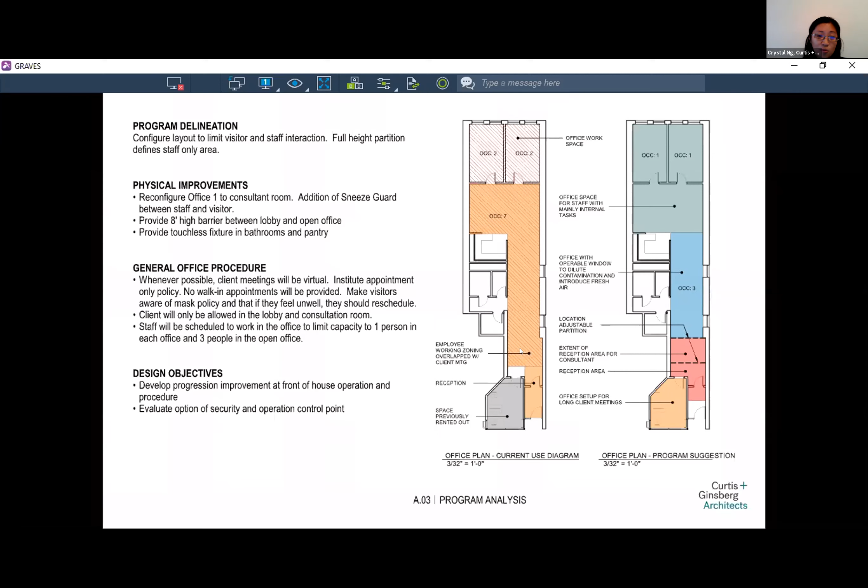In talking with Cooper Square Committee, we wanted to limit that public contact and actually create the front office into a consultation room. That would limit the public exposure to the primary office, and improve their existing wall to be a flexible design that would create a physical barrier, as well as allow for short drop offs and consultations. In addition to physical improvements, office procedures we worked on with them, such as scheduling of staff and client meetings, are critical to maintaining social distance in the office space.

Next, we tackled the ventilation. From their existing natural windows, the only rooms that had adequate natural ventilation were the back offices. The open offices were supplied by shaft spaces and windows on the side, and there was no ventilation for the front office space. So the long-term strategy we proposed was to provide an energy recovery unit with a ducted system that could provide tempered fresh air and exhaust.

This could also incorporate a germicidal UV unit in the exhaust that could deactivate the germs that don't get caught by the filter. The ERV can also incorporate high efficiency filters such as MERV-13 or HEPA filters.

But we do understand that these systems are costly. In the short term, Cooper Square Committee is going to be providing additional portable air filters in their space.

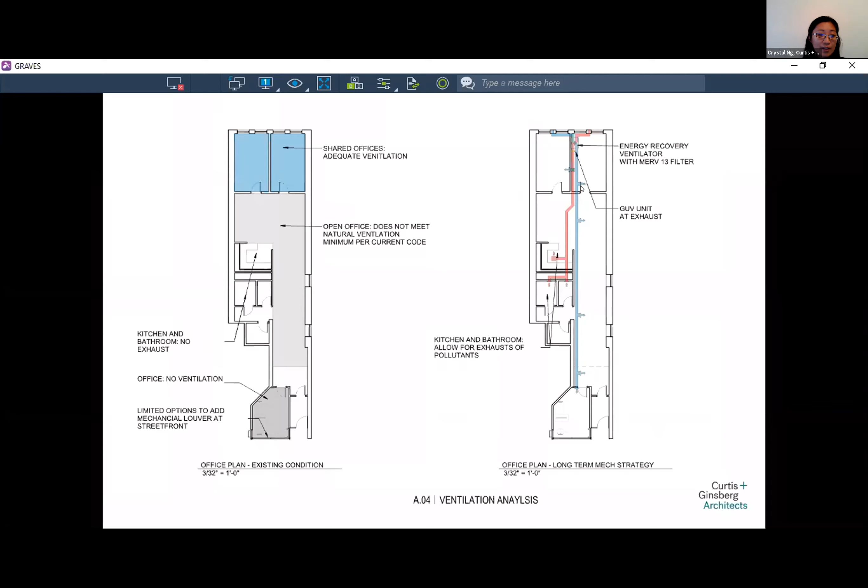For the physical barriers, we had a couple of options to increase the height of the partition wall to 8 feet. They range from off-the-shelf systems, like stud wall or modular cubicle storage units, to lightweight framing. We identified criteria such as flexibility, storage, transparency, and security as multiple aspects that the different schemes would meet.

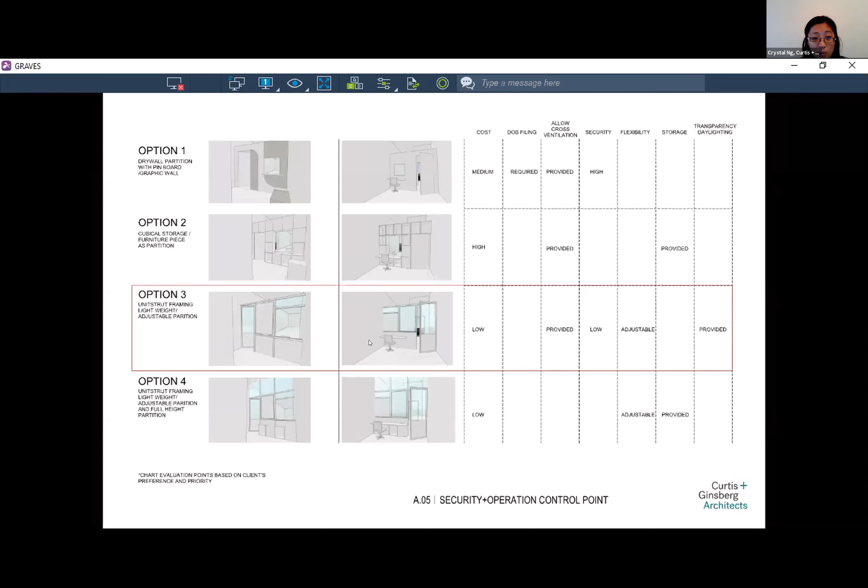Ultimately, what was decided was the lightweight option with additional transparency, to allow more light into the back office space. I would also note that in the selection of the system, there was consideration for a furniture piece instead of a fixed wall piece, so we would save time and money without filing with the Department of Buildings.

So this is the final design, which is a unistrut system with solid and plexiglass infills that could be reconfigured and moved as needs change. It also allows for a pass-through where people can bring their documents to share about their case, and a bulletin board that maintains the character and community-centered mission of the organization.

For the consultation room and reception area, we implemented pretty standard procedures by removing unnecessary furniture for ease of cleaning, placing signage about office policies, providing hand sanitizer, sneeze guards, along with air purifiers.

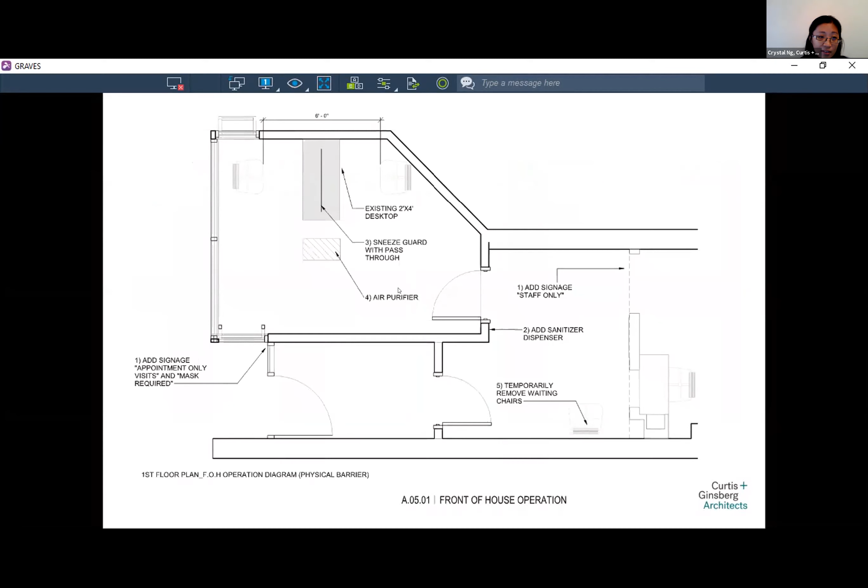Lastly, because this space did not have ventilation, we felt it was very important to add this. Adding mechanical ventilation was infeasible given the limited storefront and the length of time that modifications to the facade would have to go through for historical landmarks approval. So we proposed that the two side windows be converted to operable, allowing cross ventilation and a potential drop-off where clients could actually be outside.

So the key takeaways for us from working on this project with Cooper Square Committee is that small businesses and organizations often lack the capital and the ability to attempt to make improvements and ventilation upgrades to address COVID on their own. The regulatory cost of approvals, permits, and expediting is costly and time consuming. If the city could help, perhaps with an expedited small business hub at the building department or reduced fees, that might alleviate some of the burden.

Just as we have readily available sneeze guards off the shelf, we need to figure out easy retrofit solutions for small package ventilation and operable windows to retrofit into existing spaces. And for designers, I think this helps us think about what we would do differently when we plan new spaces, allowing for more generosity for ventilation in the spaces.

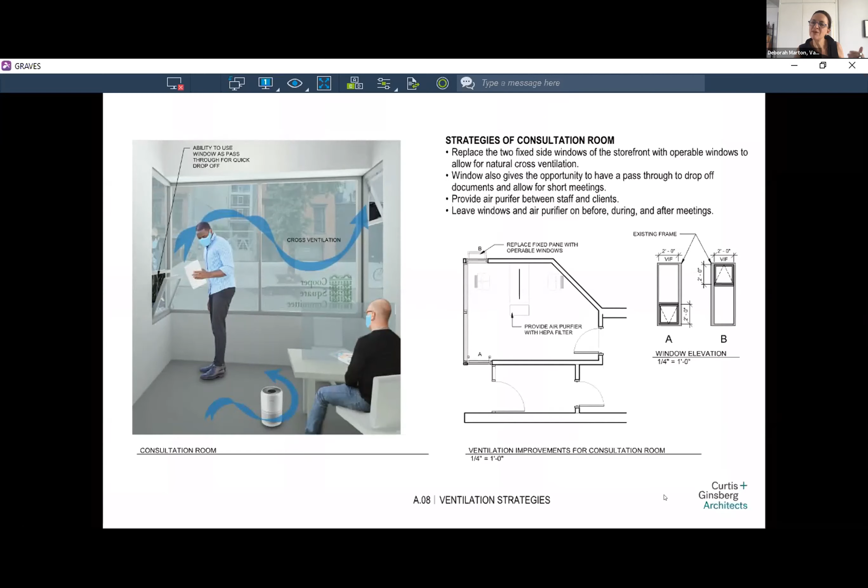Crystal, thank you. And thank you for making that connection between the design intervention and the recommendations at the policy level. That's really interesting and helpful.

Daniel and Brendan, would you like to have a last word about either of your organizations and how you worked with the teams?

I'll just chime in that with the operable windows, we're trying to find a contractor, and internally we were struggling with it, so I thought, let's ask Curtis and Ginsberg. They're here to help, so we're working with them. Having watched yesterday and today, I've realized all these other areas where I want to look to you all for help, like different technological things we're needing as we realize we've got to up our intake and screening and all the digital things we've got to do now. That's a relationship I'm looking forward to continuing.

That's great. Brendan, anything else to add? I would just like to echo what a lot of the other panelists said. It was really so refreshing to have these design professionals come up to the Bronx and not tell us what we need, but ask us what our needs are, and make real suggestions that they had clearly spent a lot of time on. The whole thing was a huge success.